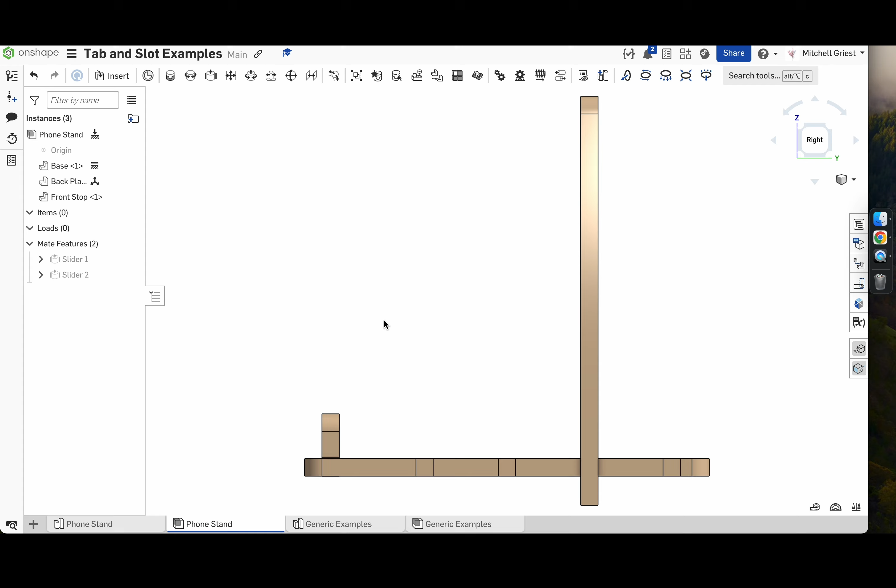From the side, you'll notice it's going to form sort of this triangle. So on some of these slots, it might lean forward. On some, it might lean back. I would say that is maybe an imperfection in the design that we should think about how we could change and improve. But for getting started with OnShape, I think this is going to be a good tutorial for demonstrating quite a few things that you want to be able to do.

So I'm going to create a new part studio. When you're creating a new document to follow along with this, you don't need to click New Part Studio. There's already going to be one created for you called Part Studio 1. So when we open OnShape, we see our three planes. We're going to go ahead and start by designing the base, just because that seems to be what the other parts are designed to fit with. This is kind of the most involved of the parts and the most complicated.

So we're going to design this thing in the orientation that it's typically going to be sitting in the real world. So we're going to design the base sitting down on our tabletop using the top plane. So I'm going to click once on top plane, and then either I'll click the sketch button or hit Shift S to make a new sketch. I'm going to hit the N key to look normal to my plane so I can look at it head on. And we're going to go ahead and define this base plate using the rectangle tool, which sits up here.

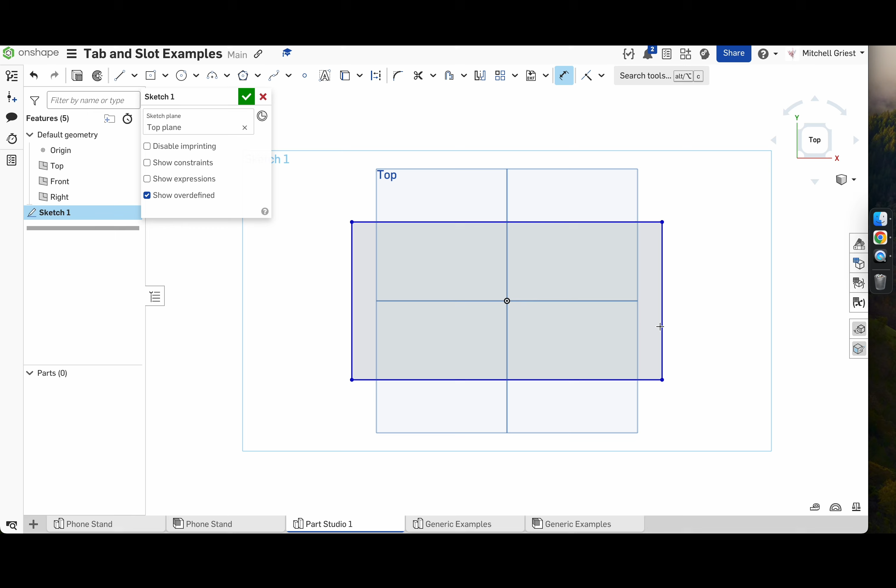We have two options, either corner rectangle or center point rectangle. We want our base plate centered around this origin point, so we're going to use the center rectangle tool, which you can also access by hitting R. So I'm going to click once on the origin, and then I'm going to click again somewhere out here. So now it's time to come up with some dimensions for how big we want this base plate to be. So again, this is something I probably will make and then laser cut out of cardboard and see how it feels in my hands. I might find that the first draft is too big in one dimension or too small in another, and then we can make changes.

But what we're going to do is go ahead and give ourselves an initial dimension, which, by the way, I access the dimension tool by hitting the key D. Click once on this line and once out here. And initially, let's go ahead and say that this thing's going to be 8 centimeters deep. So my units are set to centimeters. You can always double check by clicking on Workspace Units. And right there, your length default unit, centimeters, is what we want. So when I'm in Sketch 1, I've got 8 centimeters set for the length of this thing.

Now the back part is going to be relevant to more than just this piece. So if we go back to our example here, you'll notice this piece that I'm sliding right now has the same exact width as the base plate. And that's because, form factor wise, I just want them to line up.

Technically one could be wider than the other, but I think it looks quite nice if, when these two slots meet each other at the midpoint, we end up with two kind of square shapes that line up cleanly on the edges. And so that means that later on I'm going to want to know the length of this front edge, or we could call it the width of our base plate.

So not only am I going to dimension this by hitting the D key, but instead of just typing in a value here, I'm going to hit the pound sign or the hashtag symbol, and I'm going to type in base width, okay, the width of the base. You'll notice it pops up, it's going to make a new variable. So if I hit enter, I get this little dialog that comes up. It's created a new length variable called base width, and I'm going to type in 8 centimeters. That's what I want my base width to be.

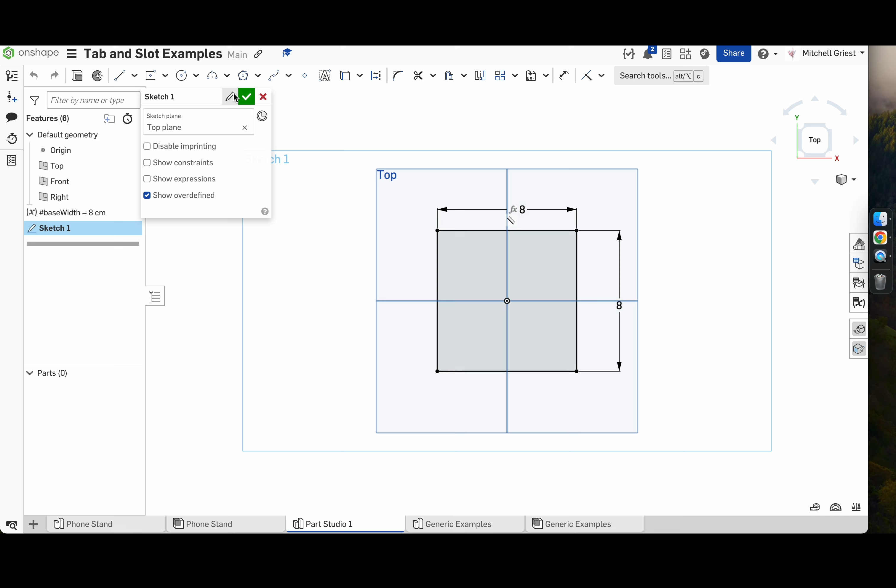So here's the basic footprint of our base. And so I'm going to rename this sketch base footprint, and hit the green check to accept my sketch. So now I want to bring this into 3 dimensions. So I'm going to click once on it and then click on the extrude tool or hit Shift E. And rather than calling this extrude 1, I'm going to call this base. I'm making sure I'm creating a new part. There's nothing to add to so far, but that'll be relevant later.

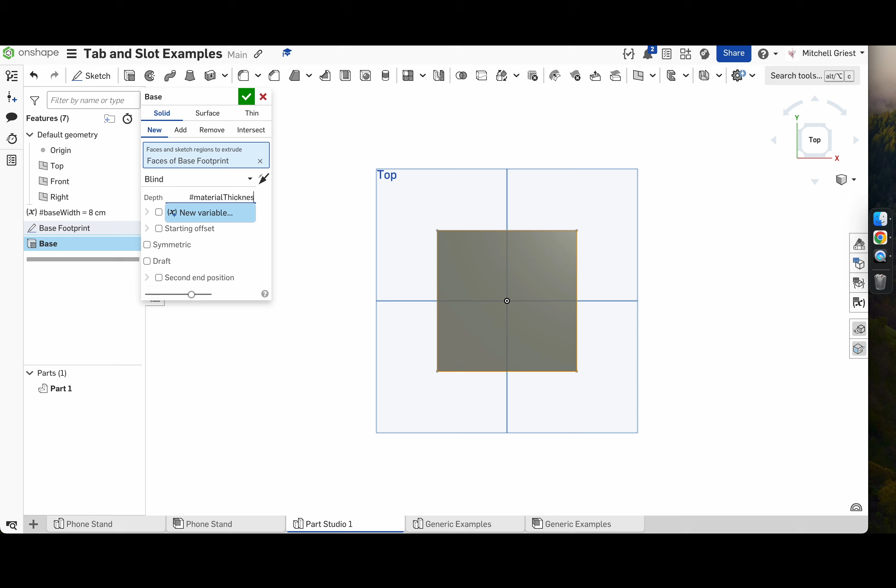And then in terms of depth, I want to model the material I'm actually going to laser cut this out of, but I have a lot of pieces and features that are going to be based on that material thickness. So instead of just typing in 3 millimeters, again, I'm going to hit the hashtag sign and type in the name I want to call my variable. We'll call it material thickness. And then I'm going to define that as 3 millimeters. That's the thickness of the wood that we typically laser cut here.

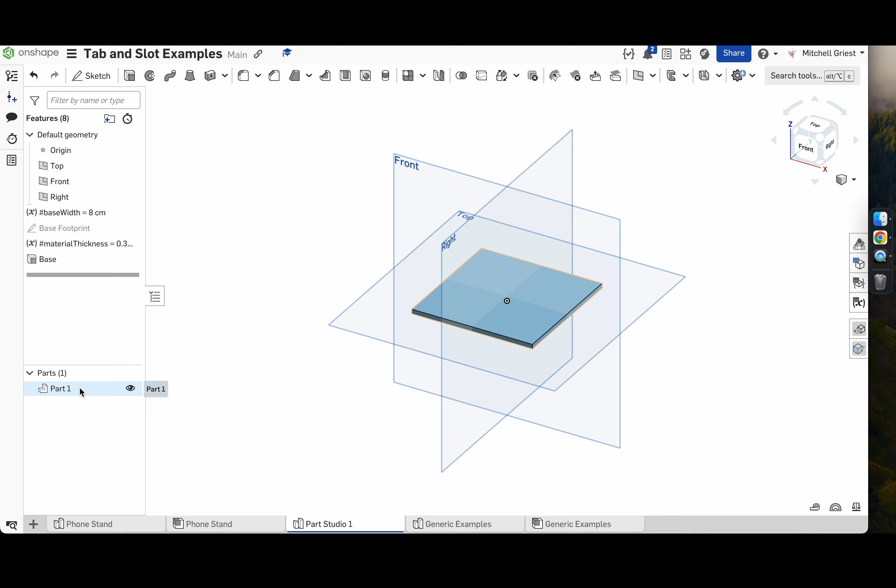So we'll hit the green check, and by the way, to get to this view, you can always just hit Shift 7. If you're ever in a weird orientation, Shift 7 will take you back to this familiar view. So now we can see it's created a part. We actually have a 3-dimensional part. This represents our base. It's not terribly interesting. It's just a square made out of 3 millimeter wood, but let's go ahead and give our part a name, because we're going to have multiple parts. So we'll rename it and we'll call this base.

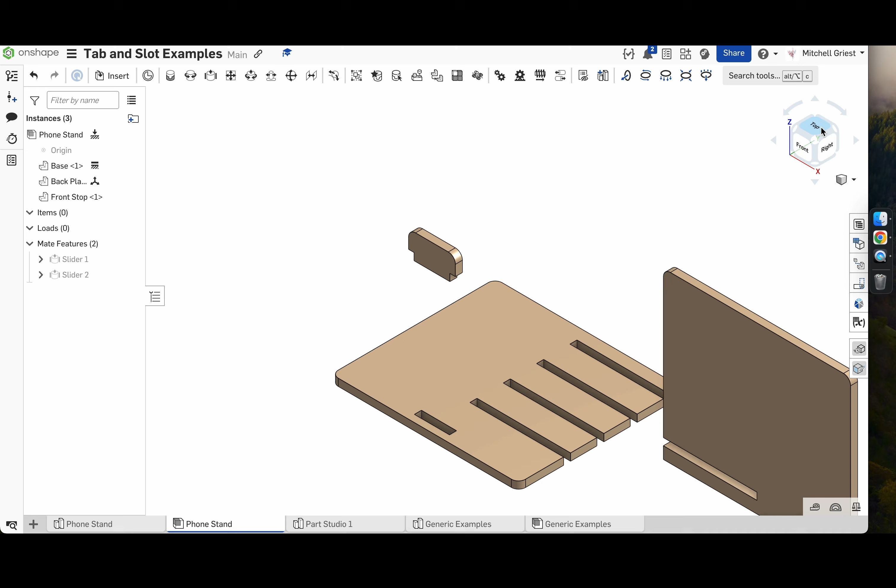And let's go ahead and right click, assign material. Oh, not material, I'm sorry, edit appearance. And I usually like to click this first one to make it look like plywood, just to help my brain as I'm modeling this see how it's going to look in the real world. Now you might notice on the finished example, we've got some rounded corners that make this thing look a little nicer to hold in your hand, a little less stabby. But we're going to save that kind of feature for the end because it's really nice to be able to just reference off of these hard rectangular lines.

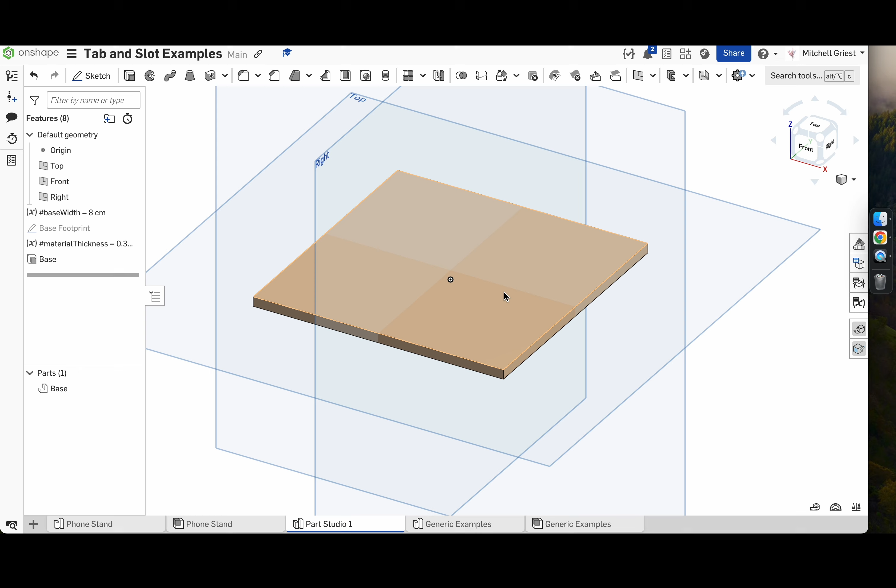So the overall footprint of our base is done. Now it's time to go ahead and add some of these slots that we saw where other pieces are going to plug into this piece. So because we've got a part that we can reference off of, I'm going to hit the P key to hide these planes because we're no longer referencing these imaginary planes so much. We're really just thinking in terms of how these features sit relative to the part I've created. So if we click once on the top surface of base, we can make a new sketch based on that surface, and we can hit N to look directly at it. So what we're going to do first is that little slot where the front catch is going to go.

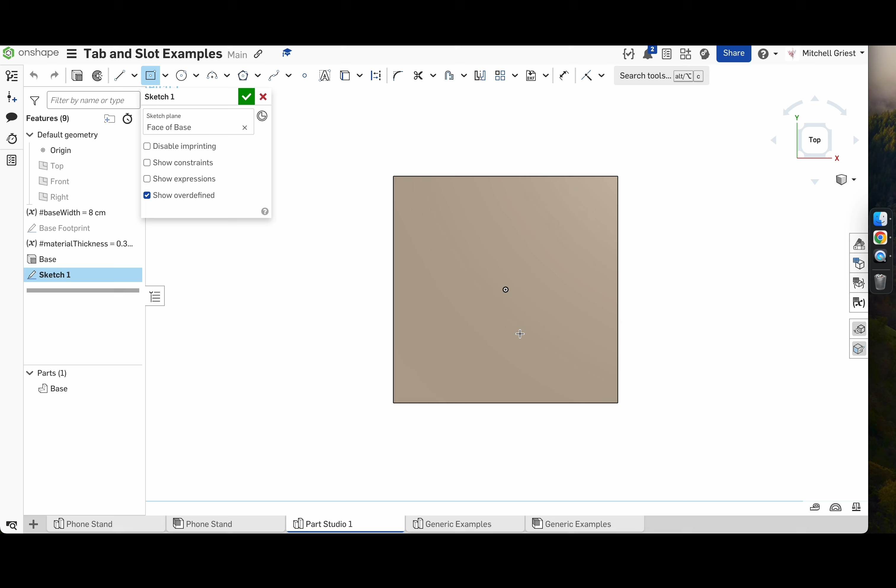So again, I'm going to grab my center point rectangle tool by hitting R, and you can see that if I'm near the center line of this part, it's going to snap and say that this is directly centered on the part below the origin. So anywhere in here is fine, but I actually do want it to snap there because I want this thing to be centered. I'm going to click once and then drag out some distance—doesn't have to look exactly like I want it in the end—and click again. So now I've created a rectangle.

This rectangle is blue because I haven't defined several aspects of it yet. It's got a flexible width, a flexible height, and its location is flexible in one direction. I can drag it up and down, but not side to side, because it's constrained to the center line.

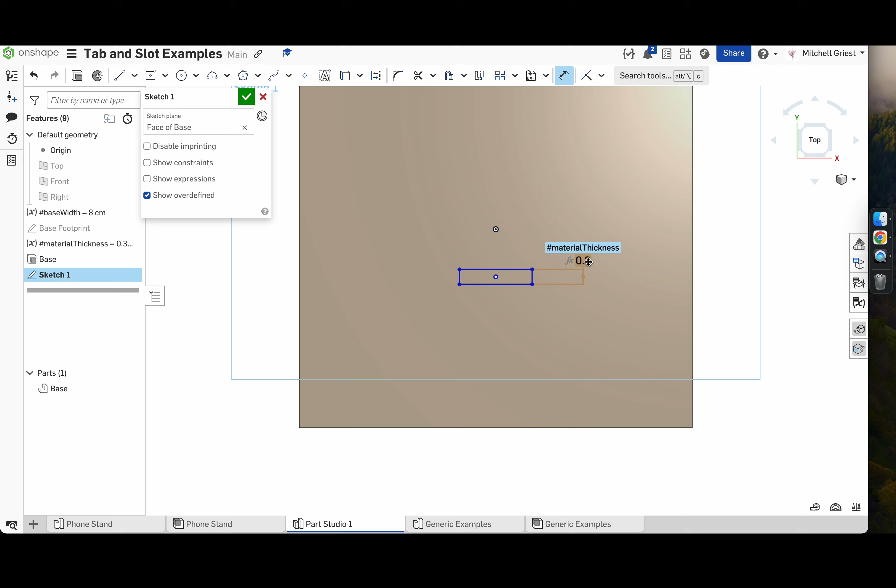So the first thing I'm going to do is dimension this short edge. I'm going to grab my dimension tool and click once on this edge, then once to the side. Now this slot has to be wide enough to accept the material we're building this out of, which means we can reference material thickness. So if we type in material thickness and hit enter twice, it'll dimension it to, in this case, 3 millimeters. The nice thing is if I were to change this value, it would change not only how far the base was extruded, but also the size of this slot, which is really convenient.

So we're going to be using variables a lot because our designs are going to have to be able to change as we prototype them, test them out, and find mistakes. It's really nice if you've thought ahead and used variables rather than having to go back and find all the 0.3s in your sketch and change them to 0.4s or whatever it is you decide to do.

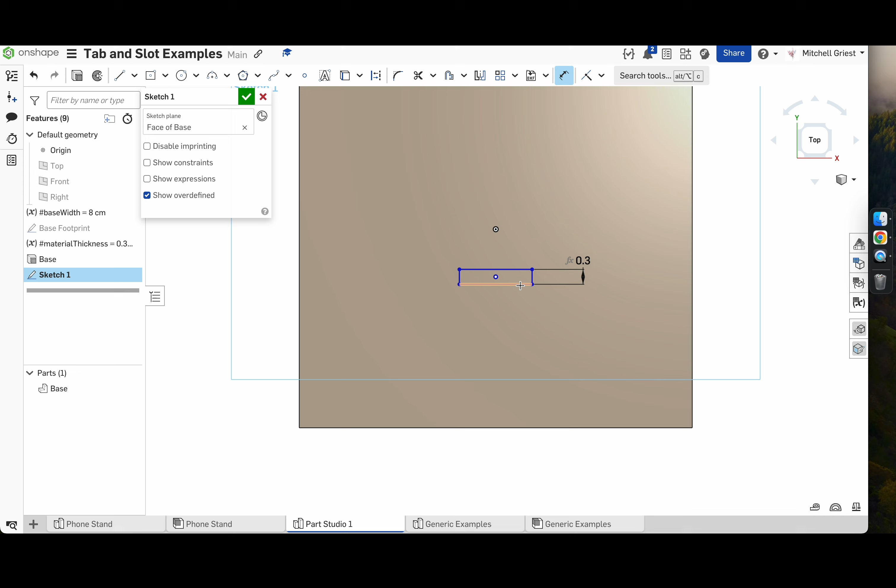So we need to define a couple more things. One is how wide is this slot going to be? We're going to create a new variable, because there's other parts that are going to reference this same thing, and we'll call this short slot width. Let's go ahead and put that in—it looks about the right size to me. So let's say it's going to be 1.5 centimeters.

So now we've created another variable called short slot width that other parts will reference, and set it to 1.5. Now the last part, and the reason this rectangle is still blue, is because we haven't constrained where it is vertically on the part.

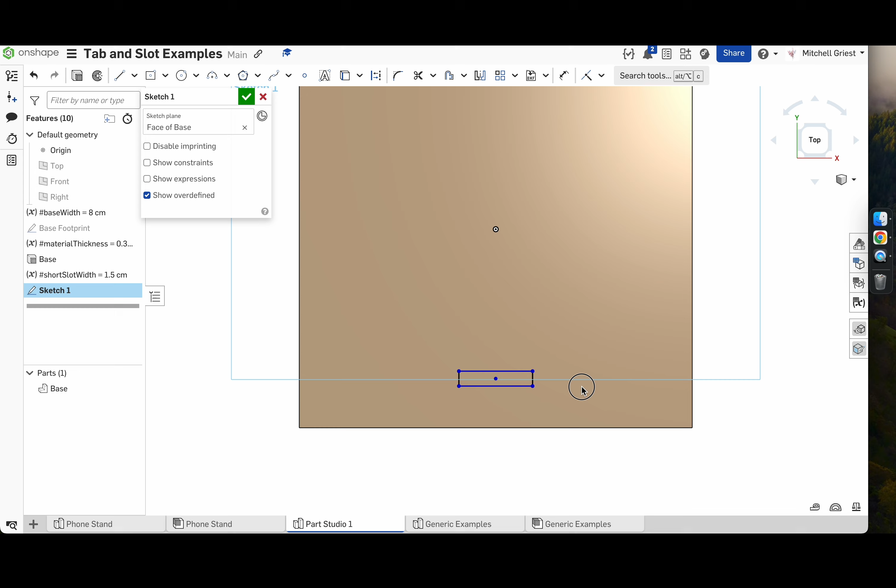So what I'm going to do is go ahead and drop a dimension by clicking on this line and then on this front edge of the base, and now I can dimension how far apart they are. Sometimes I'll use 0.3 centimeters or 3 millimeters because that gives us a little bit of sturdiness here without too much wasted overlap in the front. You may find that that's too thin and too flexible depending on your material, so maybe you want to change that. But I'm going to go ahead and just set that to 3 millimeters there.

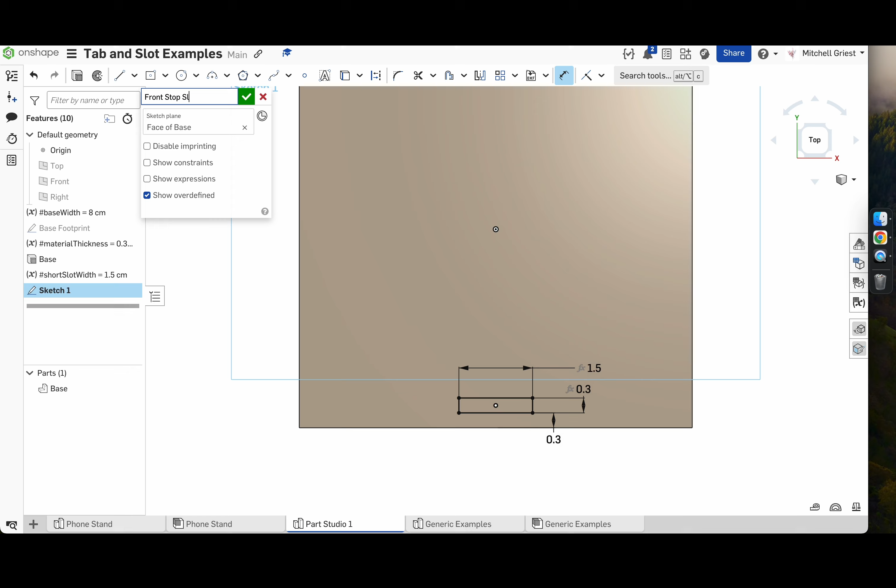Let's go ahead and name our sketch so that when we come back to edit our part later, we know what we're looking at. We'll call this the front stop slot, because that's the slot where the front stop is going to plug into the base plate.

We'll accept our sketch, and you'll notice our part hasn't changed overall. It's still a solid piece of wood. It now just has this faint rectangle on it. Well, that's because we made a 2D sketch, but we haven't actually brought that sketch into the third dimension yet.

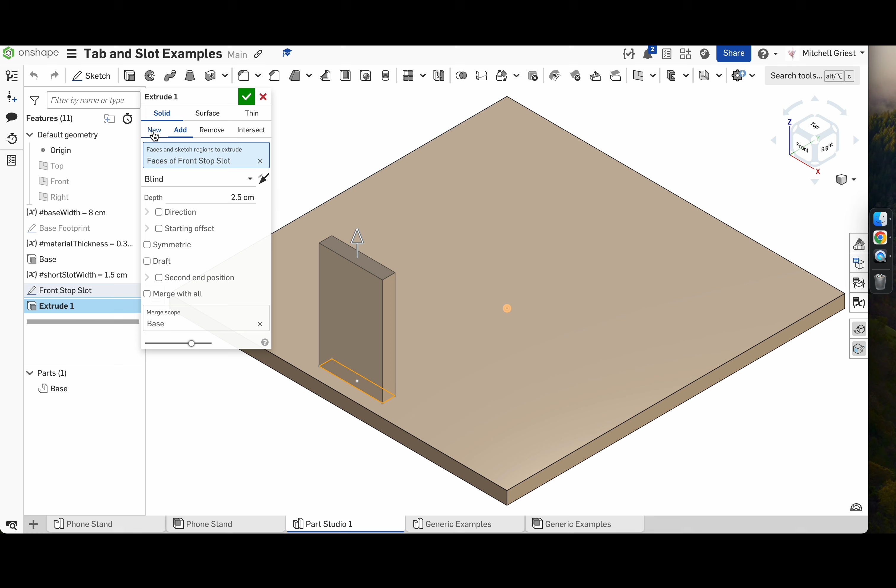So if I click once on it, again I want to use my extrude tool, only now instead of adding material or making a new part, I want to remove material based on my selected sketch. Now I don't want a blind removal, which just means remove up until this arbitrary depth that's set here. I want to remove through all—regardless of how thick this base plate is, I want this hole to go all the way through it.

I'll rename this and we'll call it front stop slot again. This is the three-dimensional extrusion of it, and we'll hit check. And now our base has a hole in it that goes all the way through.

The nice thing is, if I were to change my material thickness—let's say we made it 7 millimeters, or 7 centimeters, let's make it 10 millimeters—if I change that, you'll notice a couple things have changed, right?

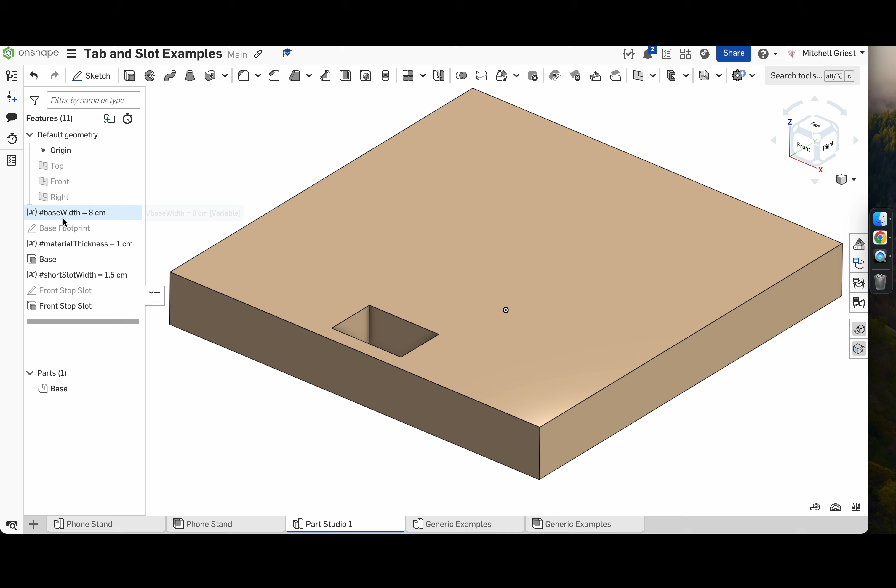Our base responded to that, it's actually thicker than it used to be. And this slot responded accordingly because it's now wide enough in this highlighted dimension to accept some of this material into it. Okay, let's go ahead and put that back to the actual 3 millimeters we'll be using.

You can see that our responsive program is updating things based on the variables that we take time to create names for. So for the next part, let's go ahead and cut in these couple of slots.

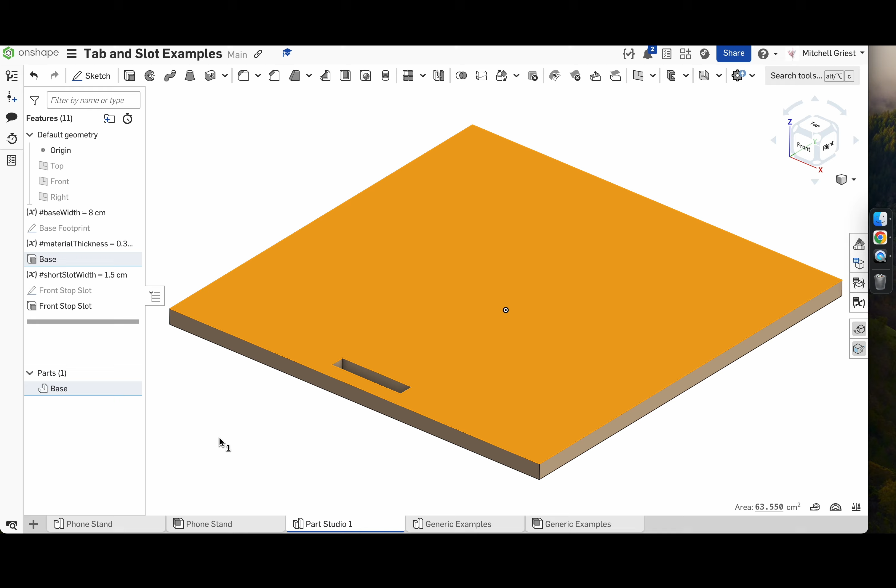These slots allow us to put the backplate in at different positions for different viewing angles. Just like we did before, we're going to click on the surface, this main top surface of the base plate, make a new sketch, and hit N to view normal to it.

We've got a couple of ways we could approach this. What I might do is start by using not the center point rectangle, but the corner point rectangle, or hitting the R key. I know that I want one edge of my rectangle, or one corner, to be on this line. So I'm going to draw a rectangle initially, and I'll make it bigger than we need.

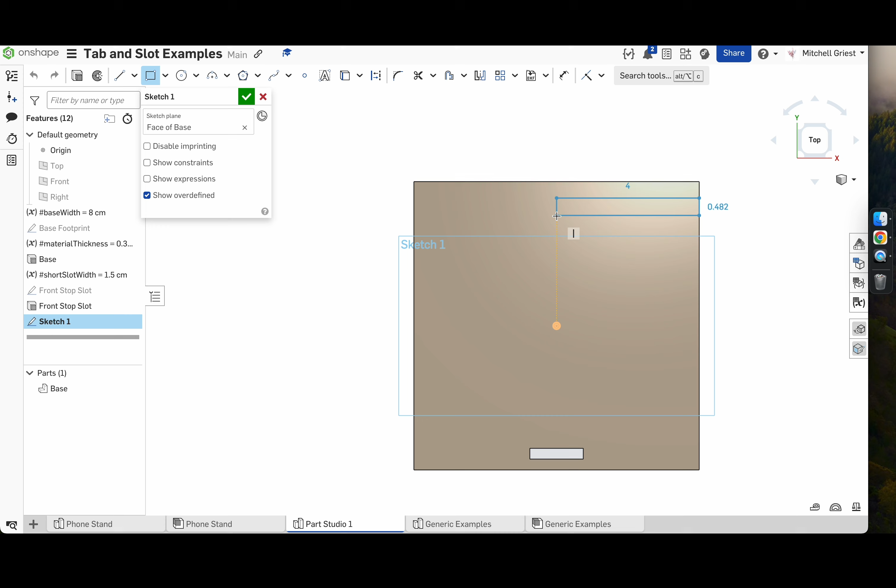But the one thing I want to do is make sure that it lines up with the center line and nicely snaps to that yellow line. That's because for this particular design, I think I want the base plate and the back plate each to have a slot halfway through, and since they're the same width, they'll line up perfectly edge to edge when I slide this in, at the same moment that this line hits this edge.

Oh, you know what? I think I thought about that. No, I think that's correct - our part should lock into place just like that. And if I'm making a mistake now, the beauty is we'll be able to make a prototype and then come back and adjust our sketches.

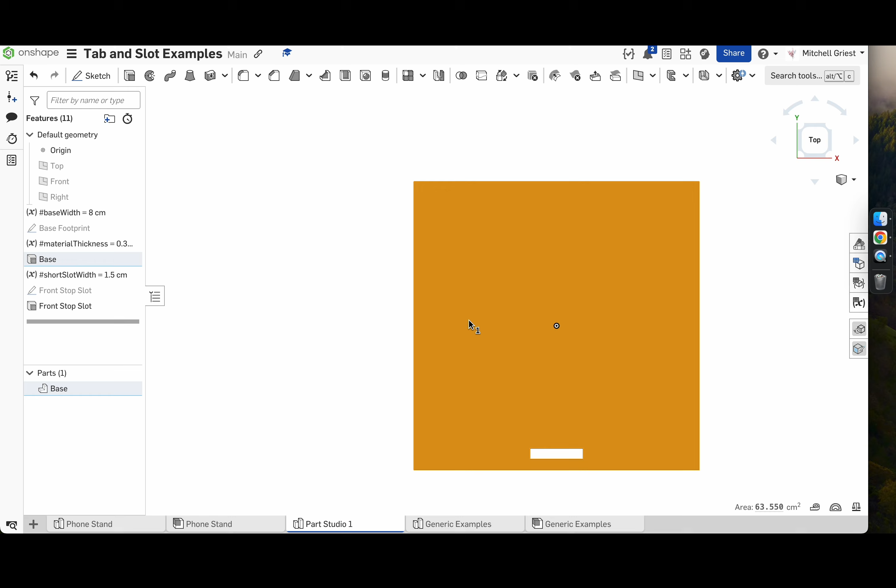So let's go back in - I actually accidentally deleted that sketch, but we can grab our rectangle tool. We'll draw a rectangle, making sure it lines up with the center line. And the first dimension I'm going to apply is by saying that this short edge needs to be based on, hopefully you guessed it, the material thickness.

That's going to tell us that this is wide enough to accept another piece of this wood that's going to slide in from this side. I'm also going to say for my backmost slot, by dimensioning this line and this line relative to one another, that I want to leave, let's say, 5 millimeters gap from the back to make this thing a bit sturdy. That looks a little bit short, so I'm going to say instead 7.5 millimeters.

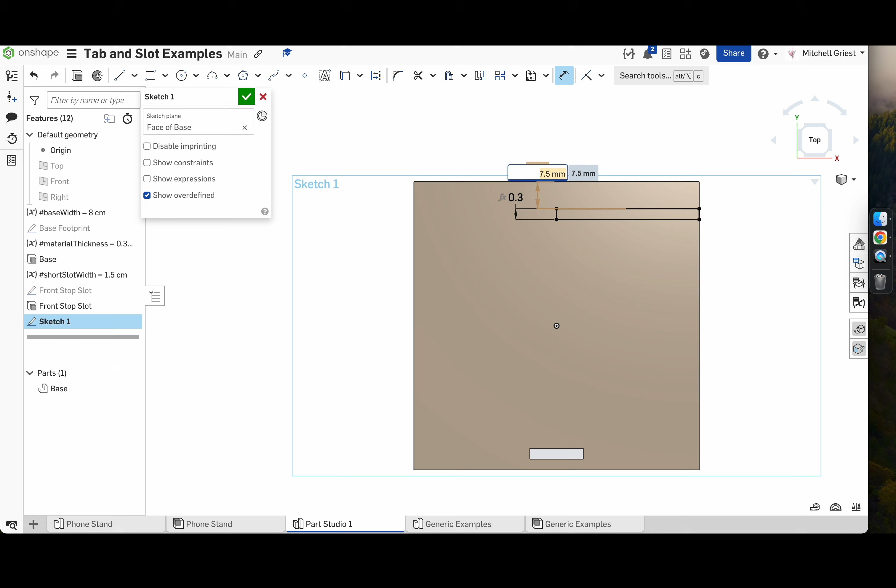I think I like 5 - not 5 centimeters, 5 millimeters. Nice thing is we can change this anytime we want.

So this is great, it gives us one slot, but we actually want to have multiple possible viewing angles. So I'm going to go ahead and drop a couple more rectangles in. I'm going to let them snap to this line, but I'm not going to worry about their positions or their sizes too much right now. So I'm just going to drop a few more rectangles in.

Here's a nice chance to use the equal constraint, or hit E. First of all, I want all of these short edges to be the same length. So I'm going to click on the one I've set and then click on another, and that sets them equal to one another.

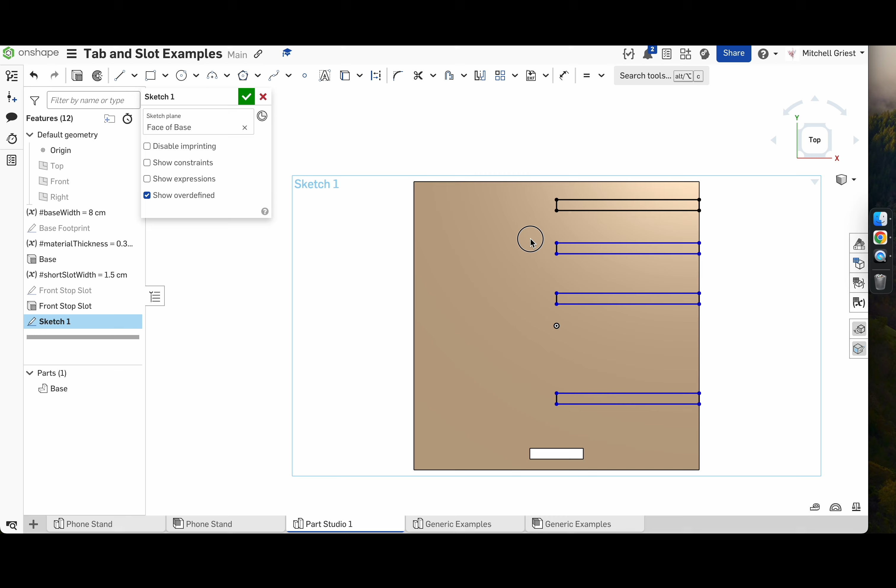So now all of these slots are going to be responsive. If I were to change this material thickness, all of them would change accordingly, which is awesome. They're already constrained to this center line, so really all I have to worry about now is the fact that they can slide up and down.

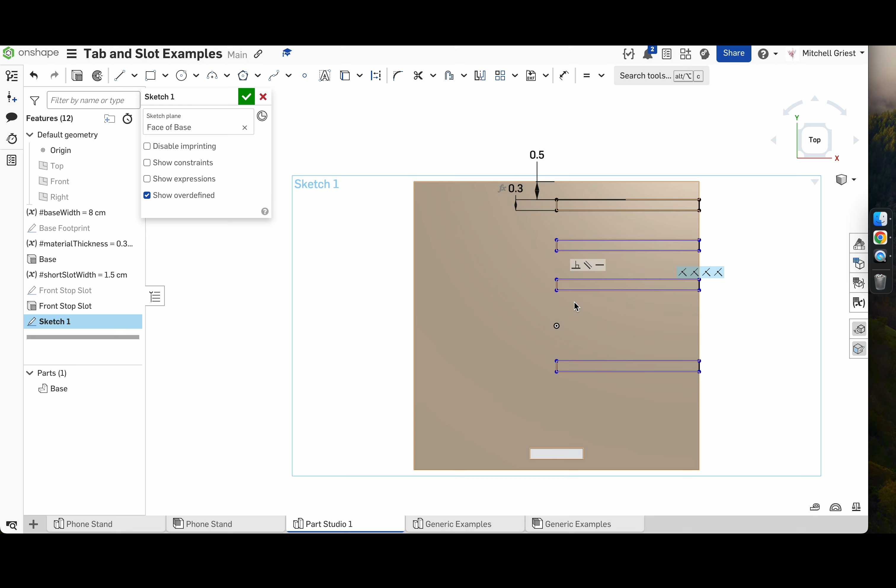So what we're going to do is adjust these around to where we want our different viewing angles to be. I know I've set this back one. What I think I may do is go ahead and create some equal spacing. There's a lot of reasons you could come up with different positions for these, and you may find in prototyping that you want to slide them around to non-equal spacing, because that's just kind of the way you end up wanting your phone to sit.

But for the sake of instruction, we're going to go ahead and grab our line tool, or hit L, and we're going to turn on this construction tool, which is also accessed by hitting Q.

What that allows us to do is draw these dotted construction lines that tell the computer, hey, I don't actually want to cut based on this. This isn't a real part of my sketch, but I do need a line here for some constraining purpose or reference.

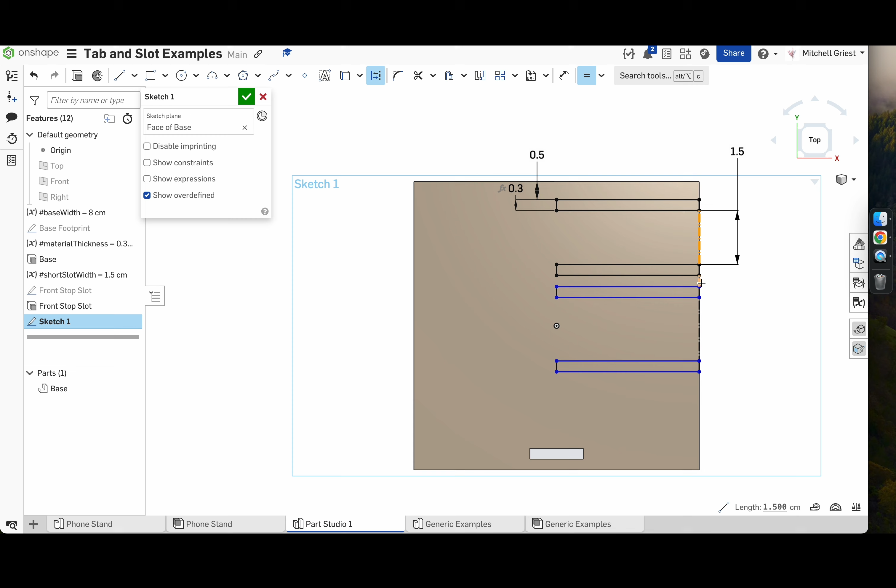So I'm going to draw one of those for connecting the inside points of each of these sets of slots. I've drawn 3 construction lines, and now I'm going to dimension them. I'll dimension just the first one, putting in 1.5 centimeters from the front edge of this slot to the back edge of that slot. Now I can use my equal tool and say I want each of these construction lines to be equal in length.

So now I have 4 equal spaced rectangles, and I can change that spacing just by changing this number. If I set it smaller, they become closer together; bigger, and they become further apart. This isn't going to be an okay placement for the front slot, so let's put it at 1.5. I think that looks good. Again, you don't have to have these equal spaced, but it gives us a nice excuse to use construction lines and the equality constraint.

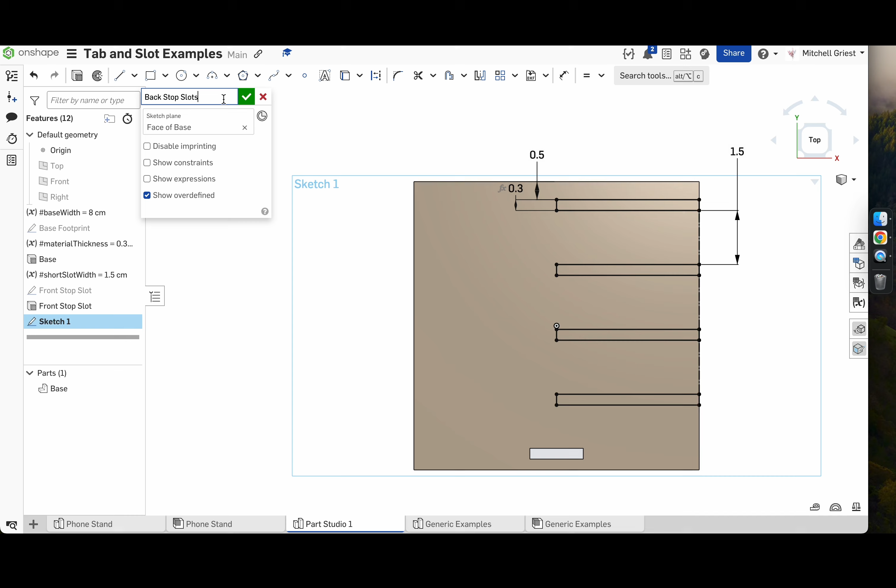So now our sketch is fully black because it's fully constrained, and let's call this Back Stop Slots, because those 4 slots are where our backstop is going to slide into the base. We'll hit check, and now we can see our base includes these little sketches on it, but we haven't yet extruded them.

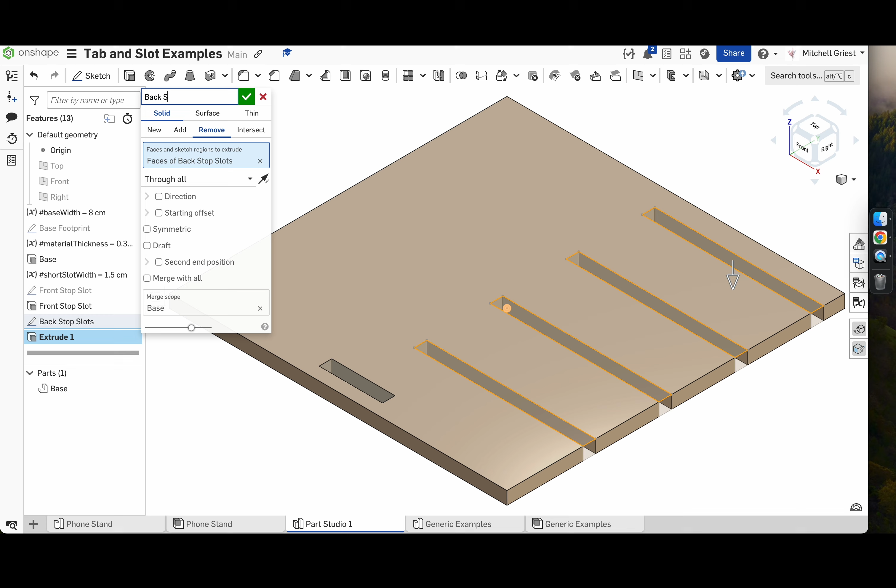So we're going to click on the sketch we just made, click the extrude button, make sure we're removing material all the way through the part, call this again Back Stop Slots, and hit the check.

So at this point, our base is actually looking pretty much complete. We'll add a couple of rounded corners to make it nicer to hold later, but the base is looking done.

So what I want to do is move these variables we created up in the feature tree, just to keep them together. There's no harm in having them defined earlier. You'll notice if I try to drag them down, I get red, because this base footprint was trying to reference this variable, which now doesn't exist above it in the tree. So I'm going to undo that change.

But all of these sketches and extrusions relate to the base, so I'm going to click on the top one, hold shift, and click on the bottom one to highlight them and put them all in a folder. We'll call that folder base. This lets me organize my feature tree, with my variables at the top where I can see and reference them, and everything related to the base in this little folder.

So with that being said, I'm going to hide this base plate. We're going to hit P to turn back on the planes, and now we're going to start work on our next piece. We could go for either one of these, but I think it might be nice to do the next big simple piece next.

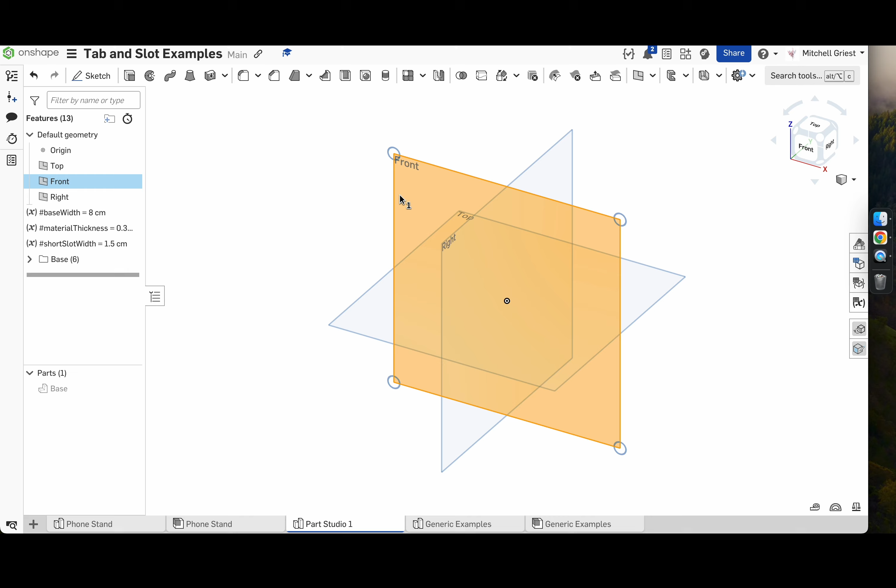So we're going to create this back plate. We'll go back to our part studio. Now this one's going to be in a more vertical orientation, so we'll click on the front plane and make a new sketch. Hit N for normal, and again we're going to want to use a rectangle to lay out the overall form factor of this backstop.

So I'm going to choose a center point rectangle, and click somewhere on this line above the origin. There's a lot of ways you could define this part; my personal preference would be to define it centered on this line, but somewhere up above the origin.

So I'm going to just lay in the general shape of my part. I'd like it to lie where this edge is on this plane down here, so I'm going to hit I, or use the coincident tool, to say that this line falls on this plane.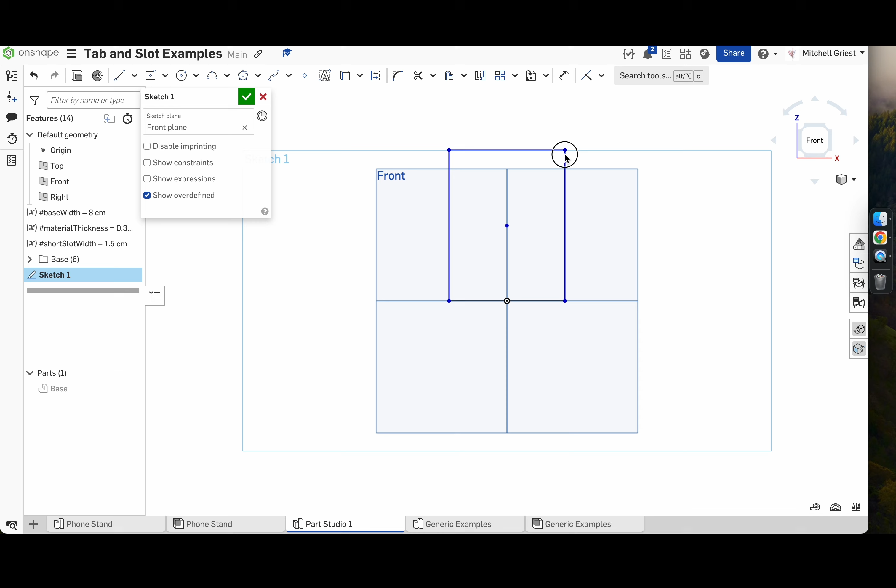And now it's time to just dimension the last two parts. I haven't dimensioned its width or its height, only where its bottom edge lies. Its width needs to match the width of the base, so I'm going to click here, and instead of typing in a number, I'm going to start typing base, and you'll notice I can select that variable I set before.

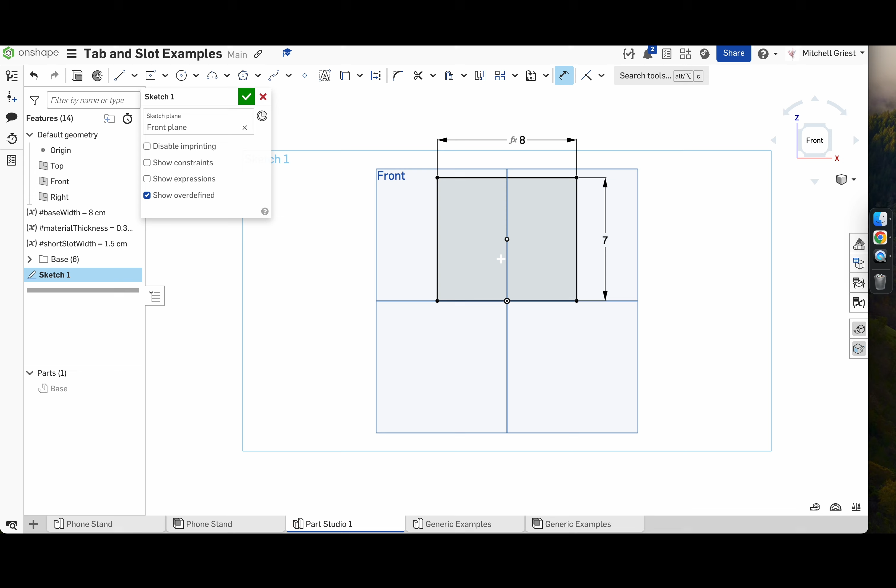The great thing is if I update base width, now it'll update both of these parts automatically. The height is kind of up to me. I think I'm going to go with 7 centimeters tall. We'll see when we make an actual prototype if that's too tall or too short. But this is going to work for the position and dimensions of our backstop. So we'll call this backstop. We'll hit the green check.

And now it's time to bring that 2D sketch into the third dimension using the extrude tool. Now, if you haven't hidden your base part, this might choose to try and add material to the base. We want to make sure we're creating a totally new separate part by clicking new here. Blind is fine, but for depth, we want to reference that material thickness variable again so that this is set to the actual thickness of our material, our wood, and we'll call this backstop.

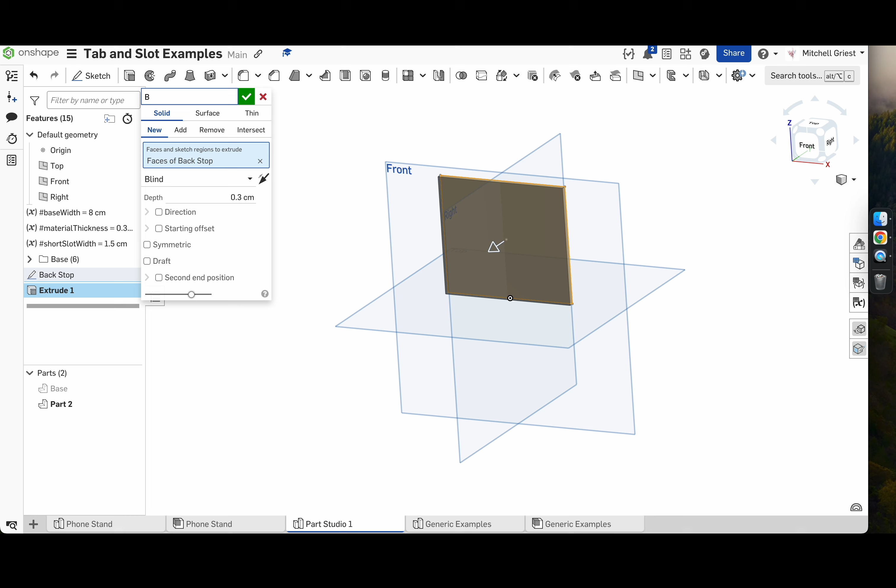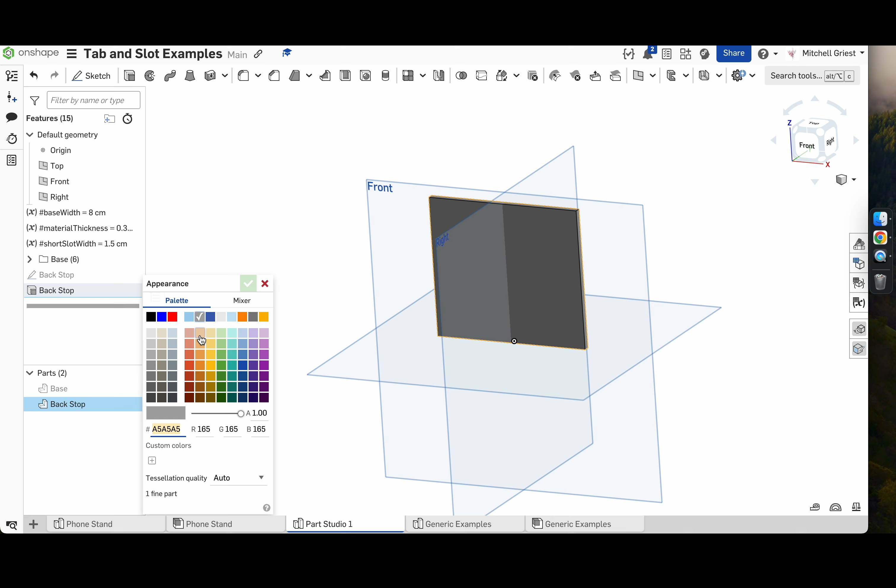That's the extrusion. So we've created now a second part, which is named part 2. We're going to name it backstop. And if we look at both of them, they kind of overlap each other in an impossible way in space, but that's fine. We're not doing the assembly yet. We're just creating our parts one at a time. So just like before, I'm going to right click and say edit appearance, make it look like it's made out of wood. And now we can go ahead and hit P to hide those planes so that we can just look at the part we're actually manipulating.

So this part has fewer features. It really only needs one single slot because it's going to slide in right here. This slot's going to line up with any one of these 4 slots for this particular design. And so to make that happen, I'm going to click on this front face, make a new sketch, hit N for normal, and now we've got to define a corner point rectangle, which is the R key or this corner rectangle tool. I'm going to put it roughly in the position I want. I am going to let it snap to the center line for all the reasons we talked about before.

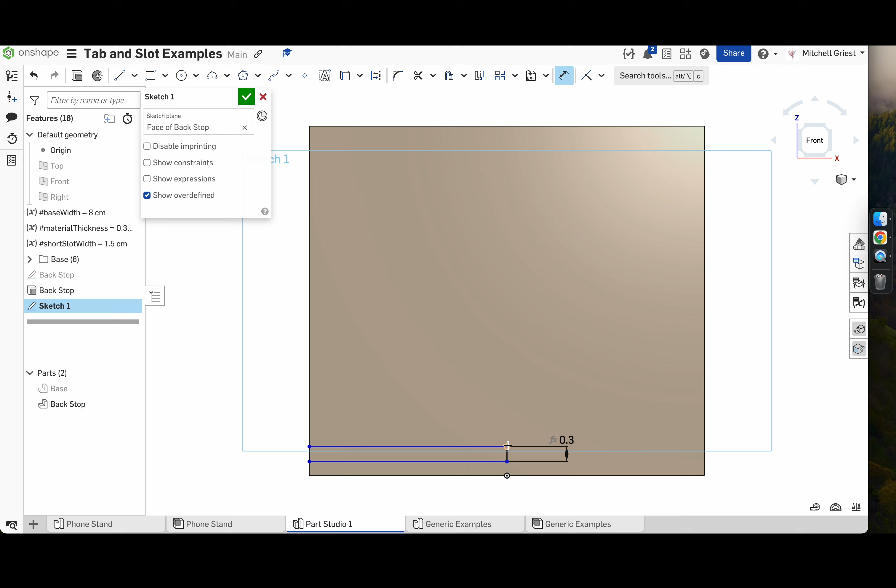And now it's time to hit D for dimension. Click on this, and hopefully you guessed that's going to be material thickness based on the wood that's going to slide into there. And its width is already set. So the only free unconstrained property of this rectangle is how high up and down it is. So I'm just going to choose, for this I think I'm going to go with 5 millimeters. That looks a little too high up actually. I don't want that much lean. So I'm going to say 3 millimeters. And we will call this the backstop slot.

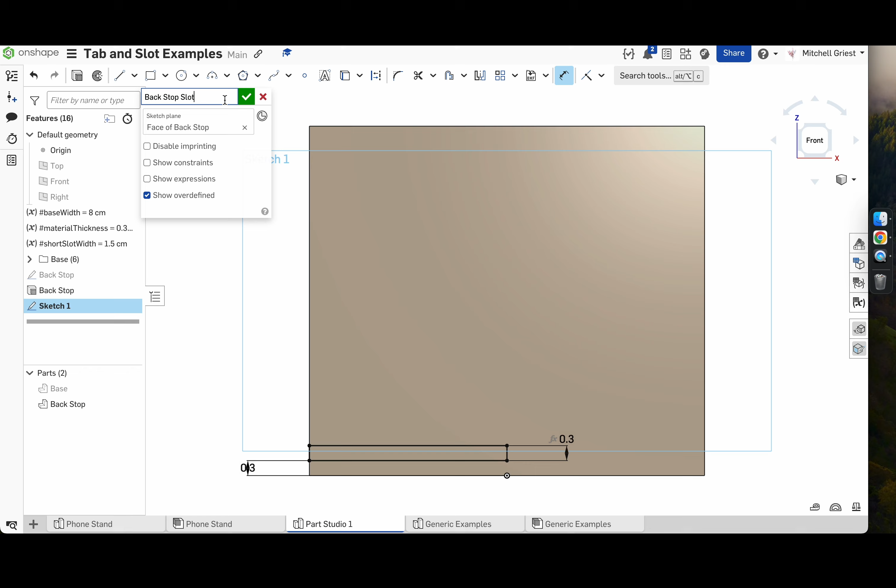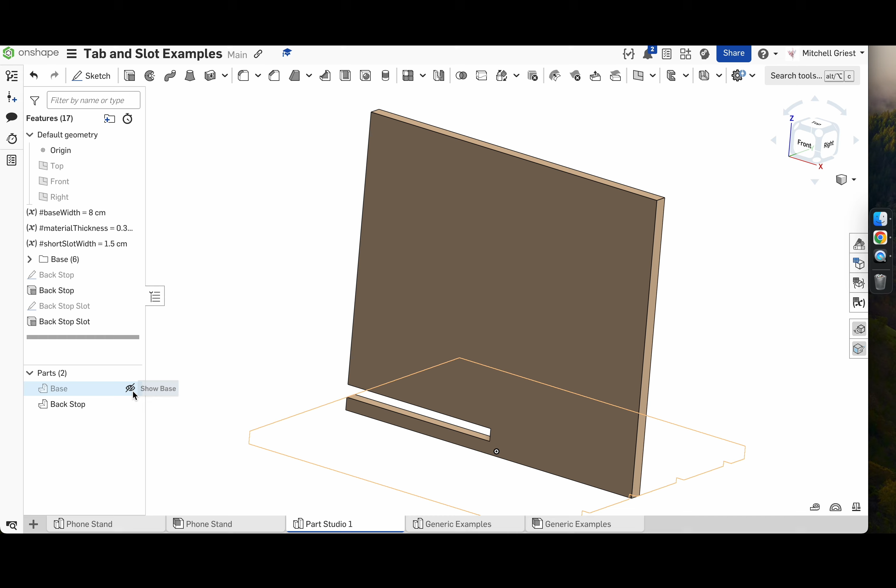And I'm going to copy those because we're going to use that same name for the extrusion. So just like before, we'll extrude, removing material through all, and we'll name it backstop slot. And now we should see our backstop actually has a slot where it can slide into our base, which is great. So we've got 2 of our 3 parts completed at this point, or nearly completed.

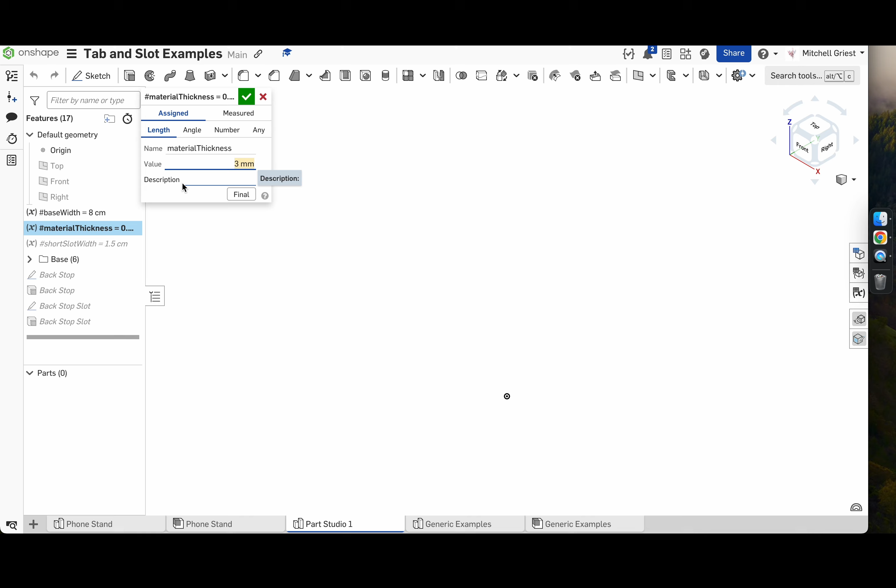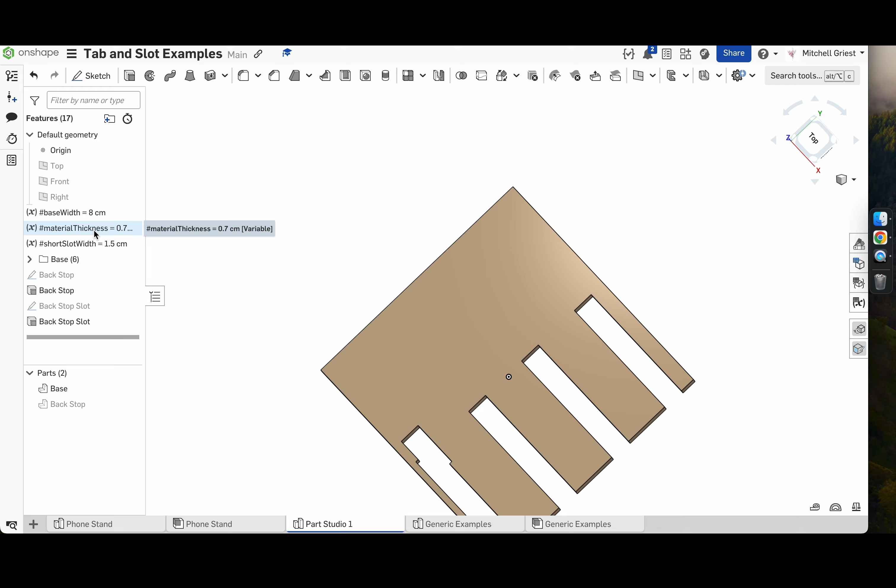Let's go ahead and double check by changing material thickness from 3 up to 7 millimeters. And if we change that variable, you'll notice everything gets really nice and blocky. What we're really looking for here is, did this slot respond? Yes, it did. Our backstop also responded. Now this chunky cut here obviously is not the way we would want things to line up, but that's because of the way we've defined the sketch to be as thick as the material plus 1.5 centimeters in between. So this design would need to change a little more to accommodate such a thick material, but the good news is we're working in 3 millimeter wood.

So the last thing we need to define is this little mushroom shaped front stop that keeps the phone from, if we were to try and slide a phone right here, it would probably just kind of slide out the front of the stand. So we're going to put this piece there to keep it in place.

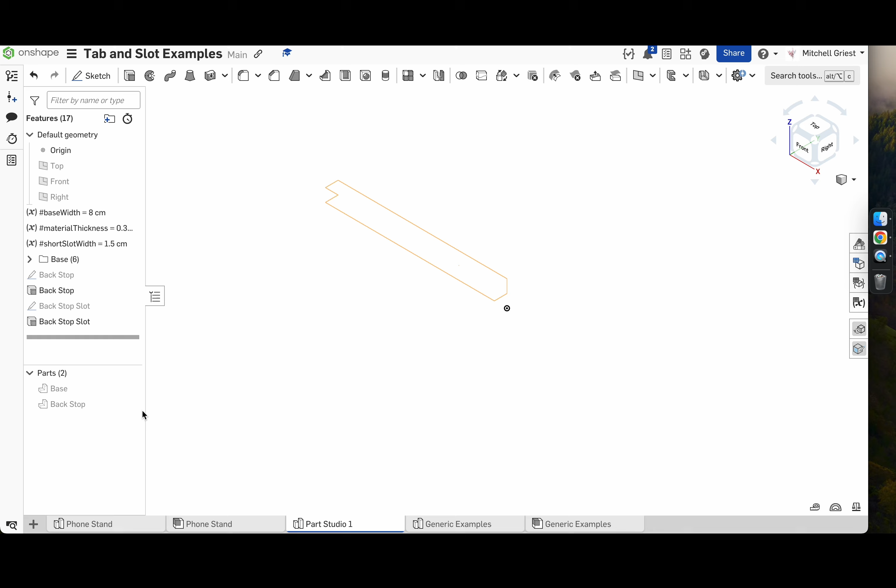So we are going to hit P to turn back on the planes. We're going to define this in the front plane, because just like the backstop, its main orientation is going to be in this kind of vertical orientation, and that's its main profile there. So we'll click on front plane, we'll make a new sketch and view normal to it.

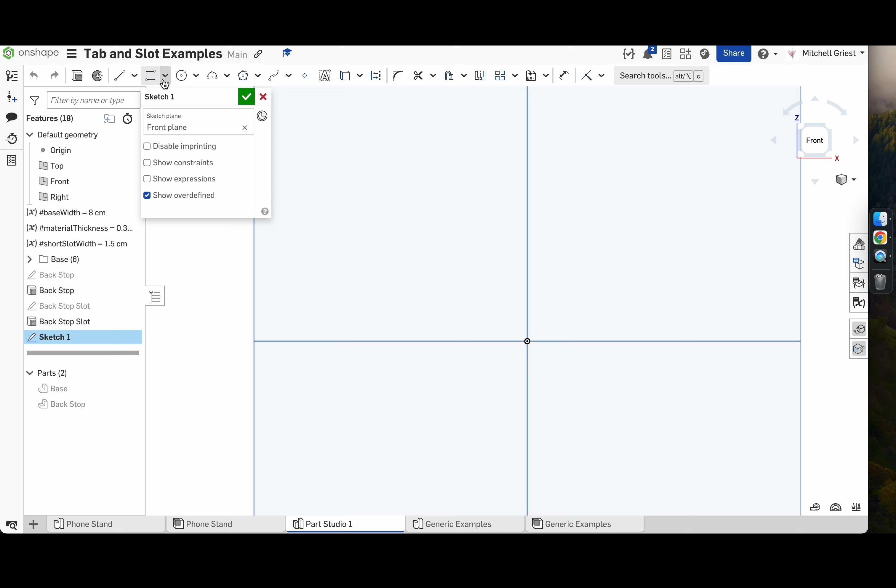And the way I would usually go about making this is using a center point rectangle centered on this line somewhere above the origin. I'd make one of those, and then below it another one, and these are just kind of floating in space because I'm going to use my coincident tool to say that this line lines up with this line and the bottom edge lines up with this line. So now I've kind of defined the rough shape I'm looking for. I haven't related them to one another in terms of relative size yet, but let's go ahead and dimension this to be our material thickness.

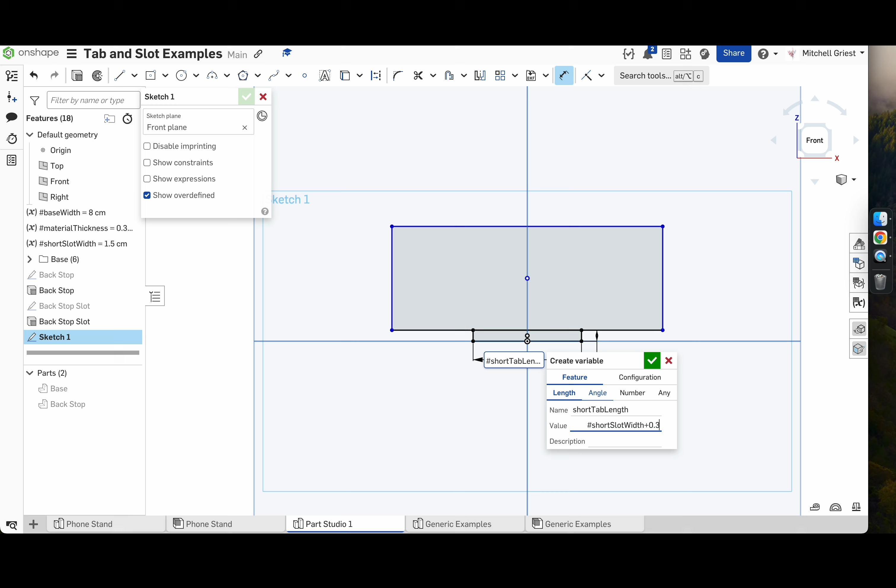This is the tab, and this part is the tab that's actually going to go into that first slot we made in the base. And so we're going to make a new variable called short tab length, and it's going to be based off of, this is kind of cool, we can reference another variable within a variable. So we'll take our short slot width, and we're going to make it slightly larger so that we get a press fit. So we'll go 0.3 millimeters in addition to our short slot width. So that's going to make our tab just a little bit wider than the hole it's supposed to fit in, which should give us, with wood, a nice press fit. And if we need to change that value later after prototyping, we will.

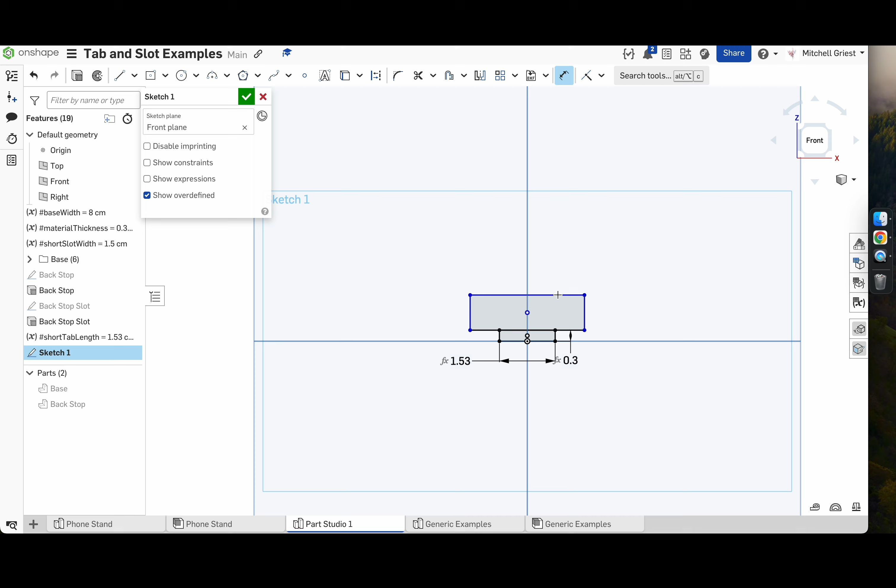The last thing we want to do is define the last two dimensions of this part. We got to tell it how wide to be and how tall. So in terms of width, I'm going to go with a pretty arbitrary 2 centimeters here. That's not a terribly wide thing, but again, we're trying not to cover too much of the phone screen with this little piece that sticks up. And then in terms of height, this is again an arbitrary choice that we might change later, but I'm going to say let's make it 0.75 centimeters tall.

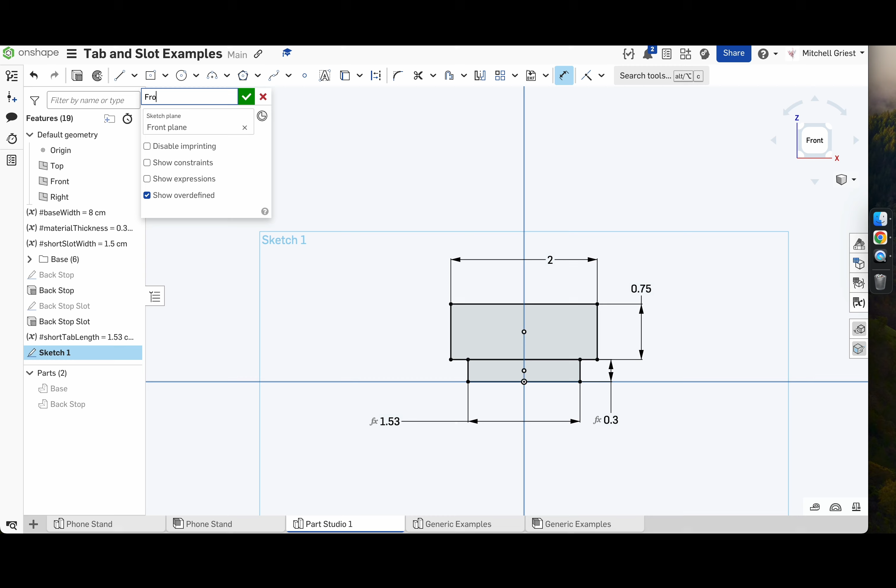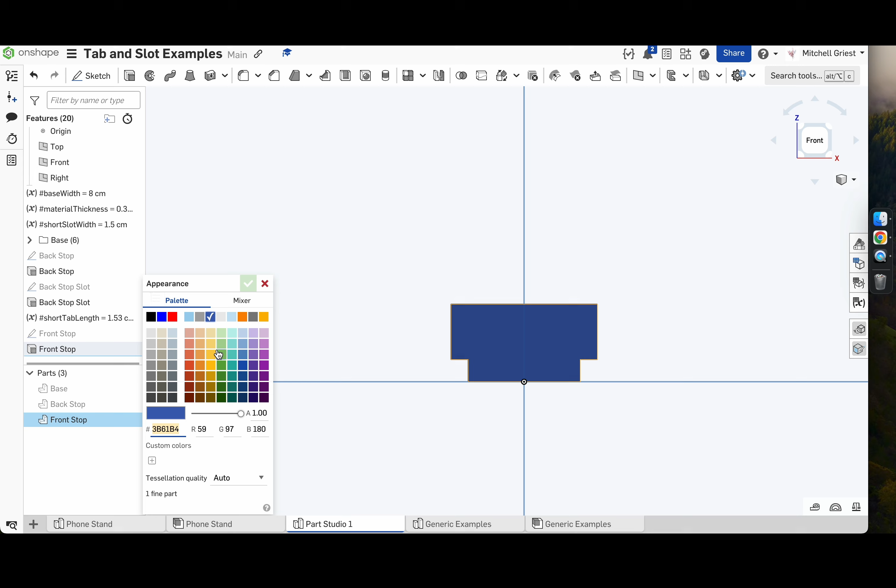That gives us an okay looking part that we may want to change the dimensions of later, and we'll call this the front stop. At this point, we can extrude that into the third dimension, making sure we're creating a new part whose thickness is material thickness, and it's called front stop. We'll rename it over here, and we'll assign it the color of that same plywood material by editing the appearance. And so when we zoom back out, we can show that we've got 3 parts now, one of which is this little part we just created.

So in a minute here, we're going to get to relating these in assembly and adding some of these nice rounded edges to make things look a little bigger so we can visualize, and then this will be ready for laser cutting and prototyping.

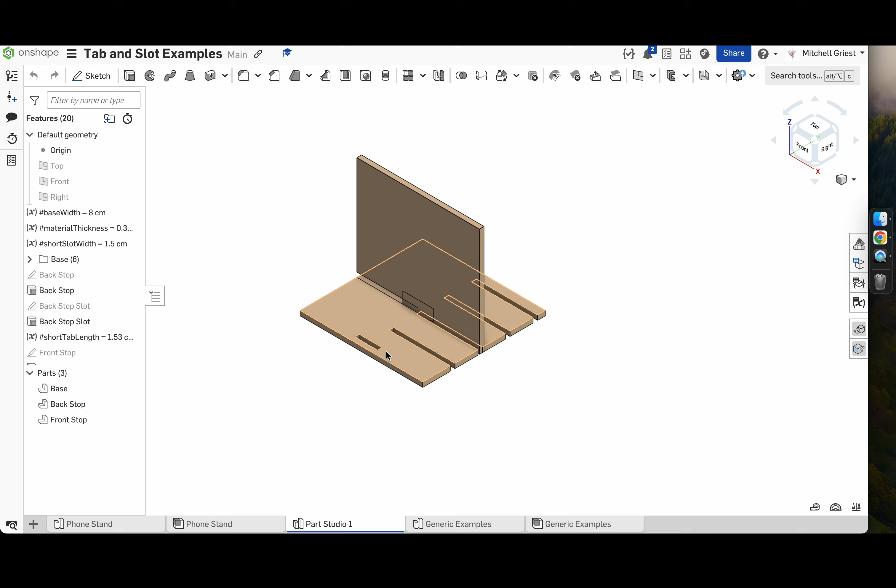So when we last left off, we had completed the basic design of each of our 3 pieces, or at least the first draft of each of our pieces. So now we're going to cover how we're able to get these smoother corners to make this a little bit more accessible, a little bit less likely to accidentally scratch someone with sharp edges. And you'll notice a couple of places we haven't smoothed the corners. So we've kept these corners square because when the part is assembled, I'd like it to sit flat on the table. I don't necessarily want it to be able to roll over on this edge. And then anywhere we have tab and slot meeting together, we want to keep those at right angles.

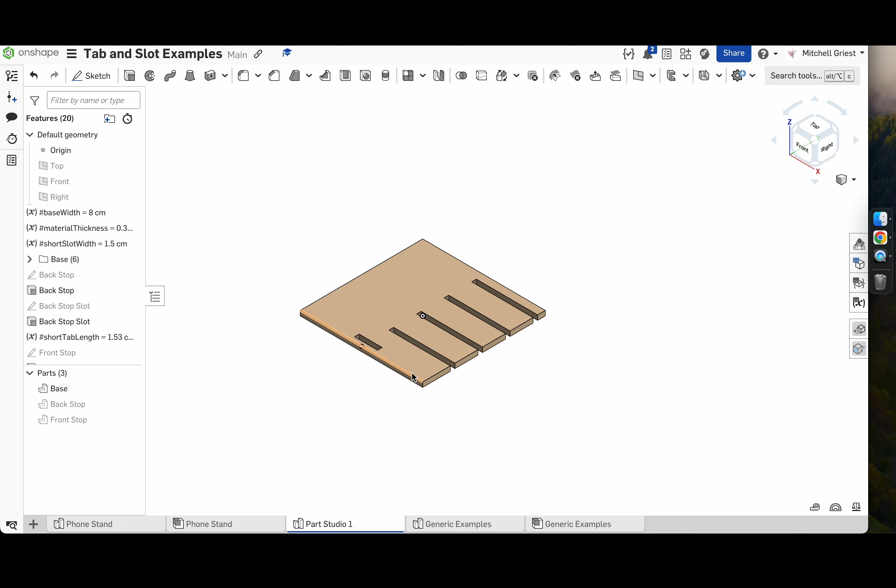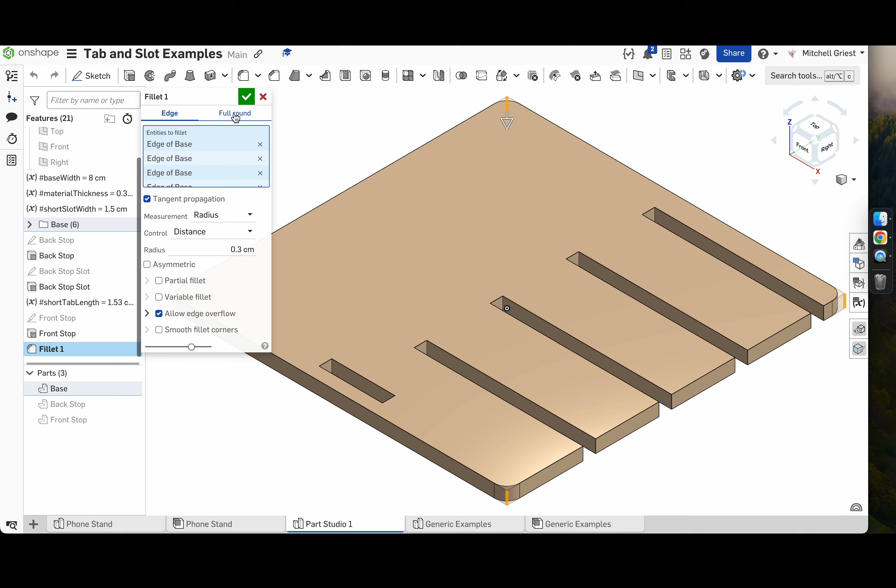But we're going to use a tool called the fillet tool. So let's start with the base. We want to round these 4 corners of the base. And so I'm going to zoom in and actually just click once on that edge. And we're going to do that at all 4 of the corners. We're just clicking on each of them one at a time. And then we'll rotate around so we can get to this final edge. And once I've selected all 4 of the edges I want, I'm going to choose this fillet tool, or hit Shift F, and it's going to apply a rounded edge there, and we can decide what radius we want.

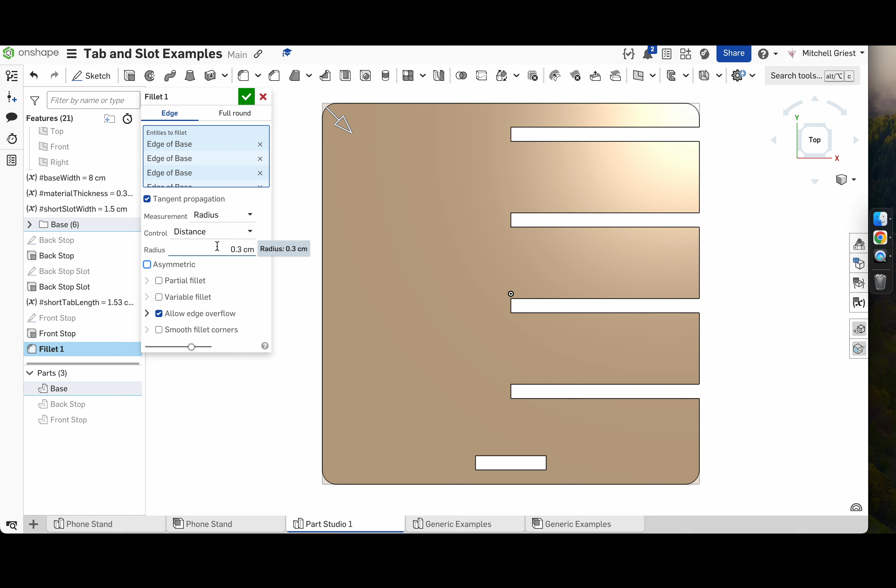Now, our limiting factor is going to be this top right corner in this orientation. You can see if I put in a larger number, I get a smoother round, and that's ultimately probably going to be fine here. But remember, there's only about 5 millimeters separating this edge from this edge, so I may want to go with a slightly less aggressive fillet and still round out the corners. So I think 3 millimeters is going to be plenty. You could of course change this later to whatever you like. But with that fillet added, our base has been smoothed out at the edges.

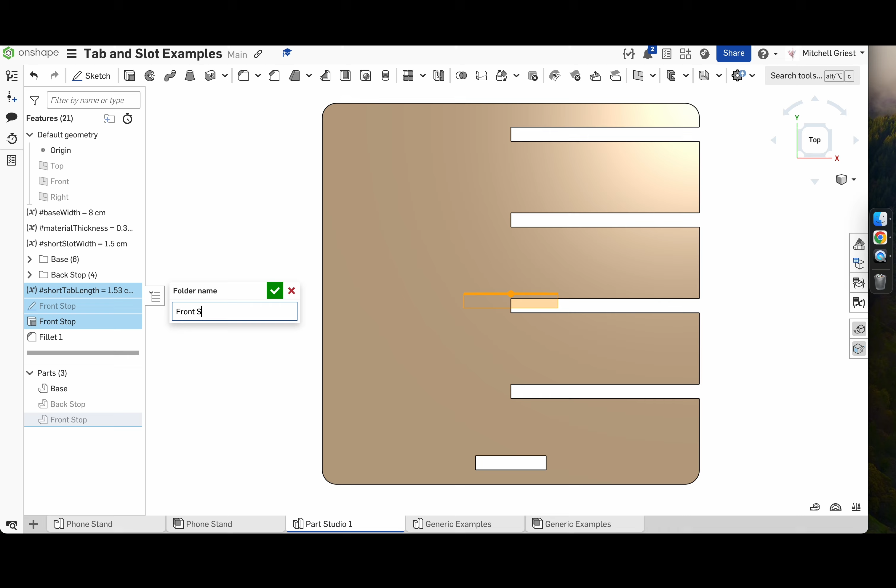One other thing we're going to do is group all the stuff related to the backstop into a backstop folder, as well as the front stop. And we'll leave these fillets on the outside of any of the folders. So let's take a look at the backstop. There's just two corners we want to round here. So I'm going to select that edge and that edge. You can think of it as what edge would I be sanding if I was going to sand around this piece. We'll grab our fillet tool.

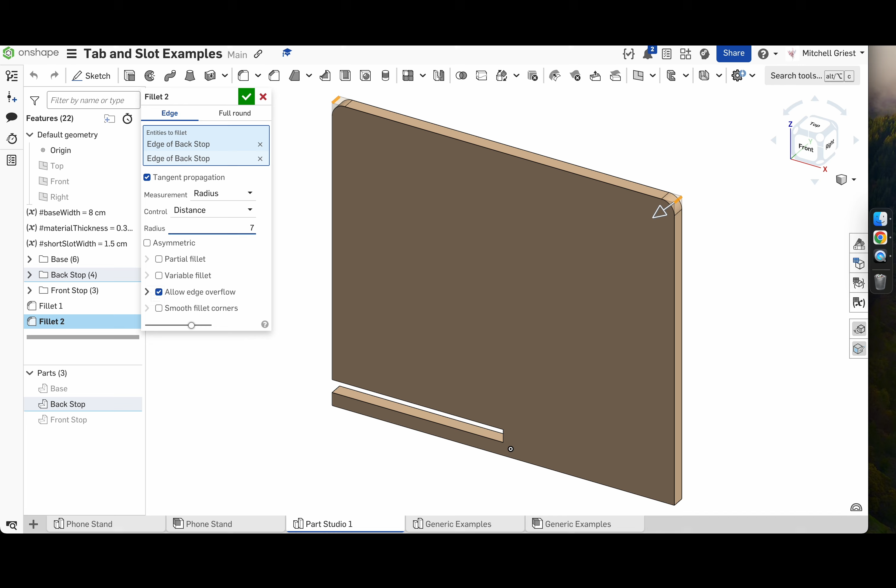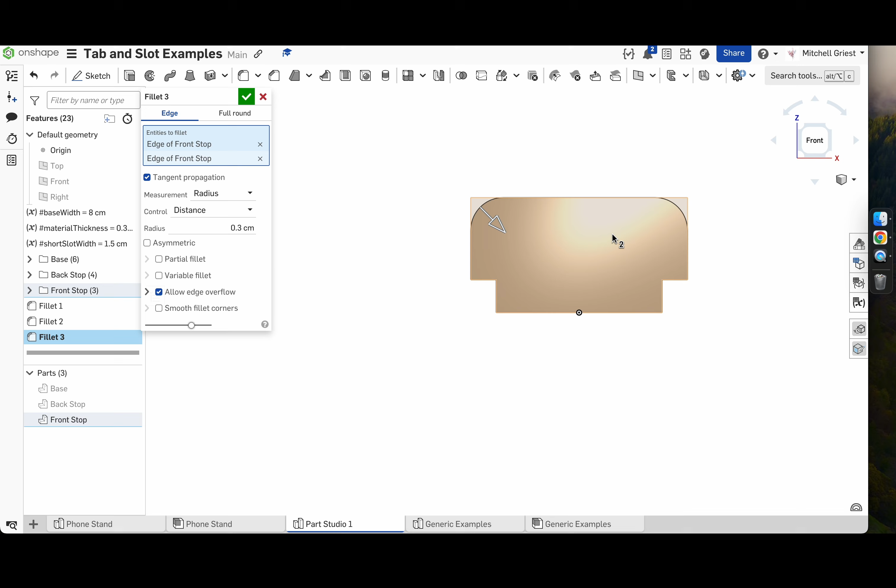For this one, I might bump it up a little bit. Let's say we wanted to go to 7 millimeters. Let's look at that from the front. I think that looks pretty aesthetically pleasing, so I'm going to say OK to that. And then we'll hide the backstop and grab the front stop. Again, we will highlight the edges one at a time that we want to have affected by the fillet tool. This one's much smaller, so I'm going to start with 3 millimeters. Let's take a look from the front. I think that looks pretty good, and so we'll round that.

So you'll notice when we show our parts now, they've got nice rounded edges. The last thing I want to show you is how I actually made this little mock-up where I could slide the pieces and mimic how they're going to fit into each other. You'll notice they're able to pass right through each other. That's because I haven't actually applied any limits to them. I've just related them along their edges, but we're going to do even better in this example. So these three parts are stationary because we're in a Part Studio. I'm not able to drag them. They're just anchored to wherever I defined their geometry using sketches.

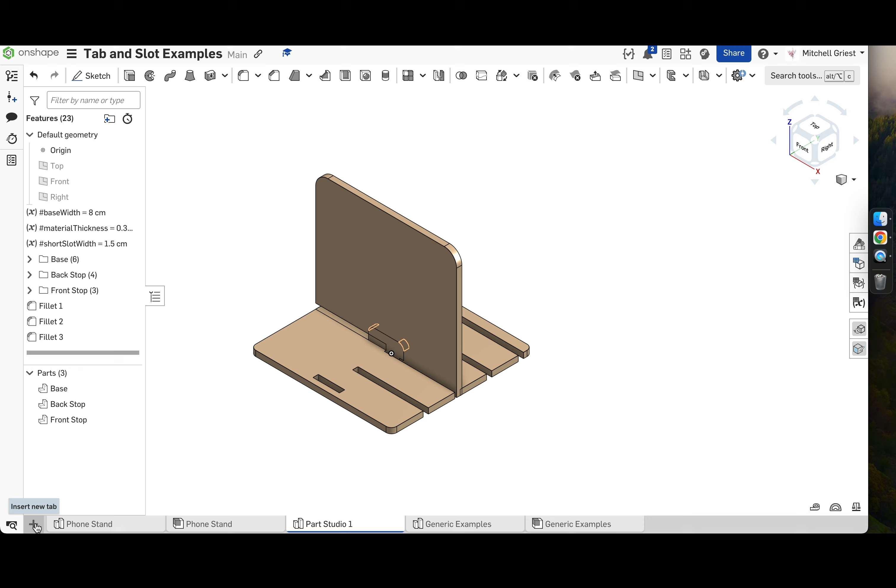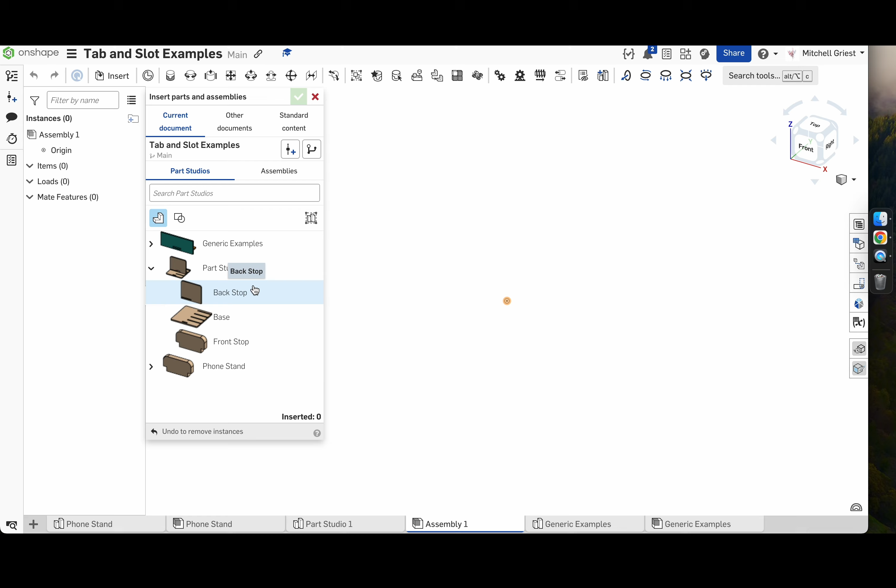So if I want to actually start to relate them and test my ideas before I make a cardboard prototype, I can choose New Tab and create Assembly. An assembly is a place where we can drag and drop parts that we've defined in Part Studios and then relate them to one another. There's a lot of different things you can do here, but we're going to start by inserting. I'm going to expand the Part Studio 1 list, and we'll start by inserting the base. That should show up, and I'm going to hit the green check.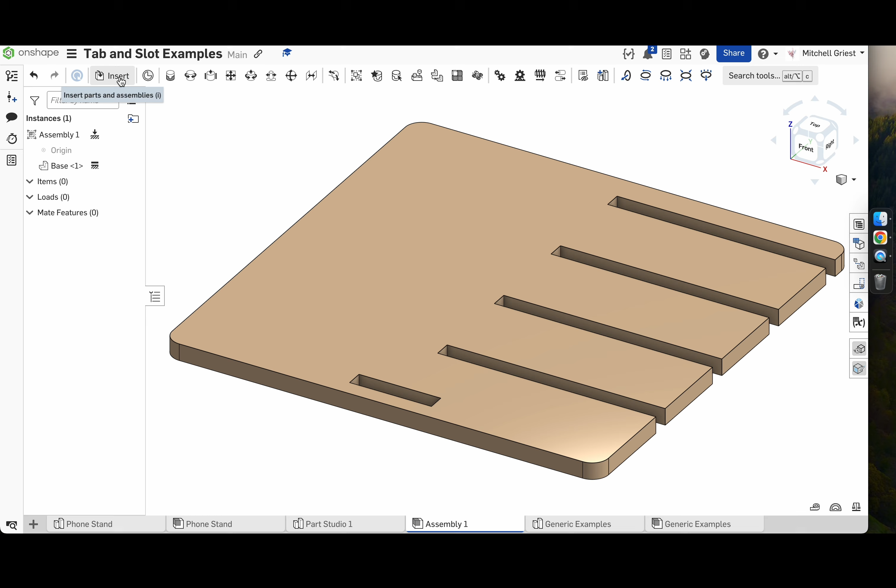If I right click on this base, I have an option to fix. Now, each assembly should have a maximum of one fixed component that we base everything else off of. So this is now fixed in space. I can't drag it. We can hide the origin because everything's going to be based on where this piece is. Next, let's expand this list and start with the front stop. You'll notice if I drag out here, the part follows my mouse around. So I'm just going to set it somewhere where I can see it. Hit the green check. And we want to mimic the way, just like I had in this one, that this drops down into the slot.

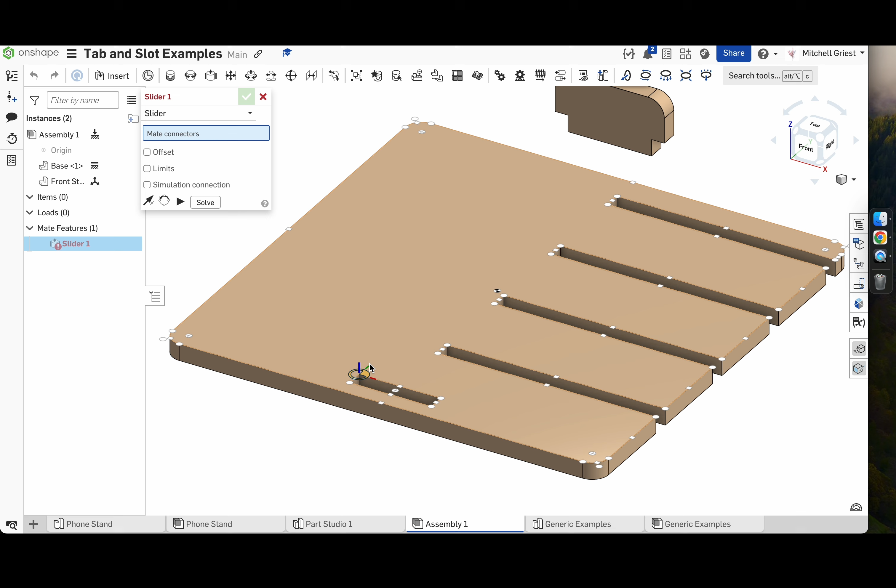Right now it has too many degrees of freedom. I can drag it anywhere all over the part. So we're going to use something called mate connectors, and these are going to be called mates. A mate is a way that you relate two parts. We want this part to be able to slide relative to this part only in the vertical axis, so we're going to use what's called a slider mate. You'll notice once you select slider mate, as you hover around, you get this little set of axes jumping around and clipping to different key features on your part. I like that this has the blue z-axis pointed upward. We're going to go ahead and select this front corner.

So we'll check that front corner should be related to this front corner on our part. And this one happens to be working right now. A lot of times to grab the second mate connector, you need to rotate and zoom to get it just right. But if I click on that, if I just accept this, now we should see that my part is just like in the other demo, able to slide up and down.

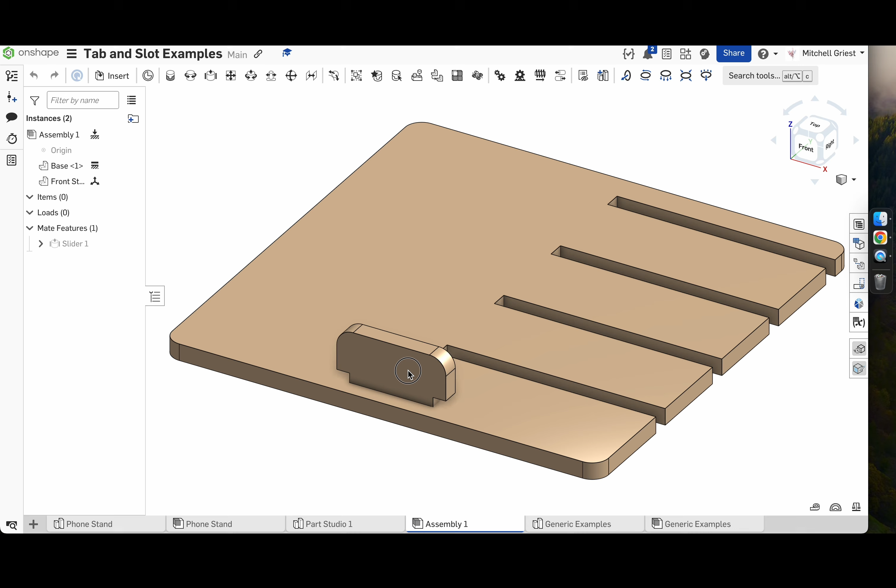But let's go ahead and limit it so that when this kind of clicks into place, it stops. We can do that by double clicking on our slider and setting some limits. So I believe the positive Z direction is up. So we don't want to have any maximum, but we do want to say a minimum of 0 centimeters, and that should limit it so it can't pass through the part.

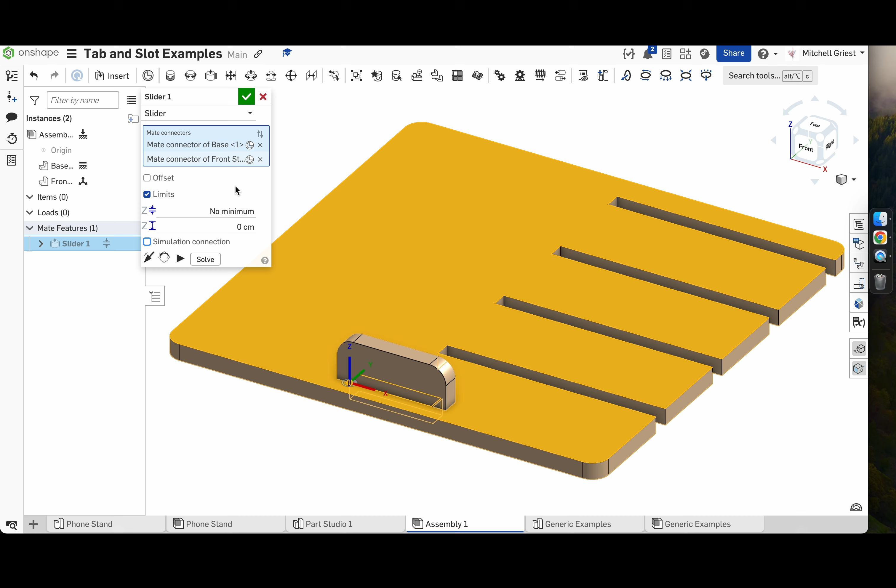Let's try this out. Looks like I got it backward, so it's the exact opposite. It's only able to go below the part, and that's fine. I've never really gotten the hang of setting these off the bat, but we can just swap that for a maximum of 0 and no minimum. Let's try that out. It looks like that's exactly what we want.

So now this part will stop. I'm not able to drag it down into there, and we can kind of see the way that it's going to notch down into our part. We're able to see that nothing is sticking out below here. Now we'll talk about that in a moment.

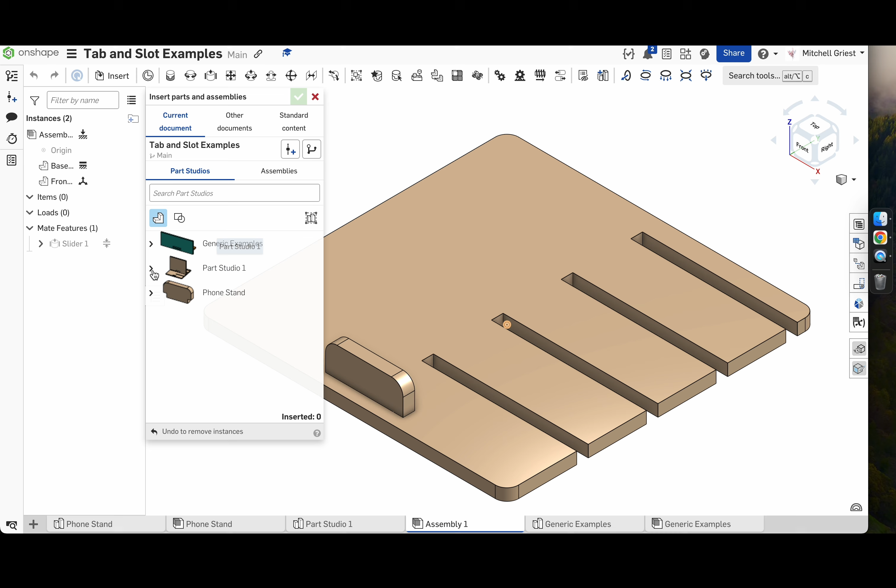But let's go ahead and bring in our final part from this drop down, which is going to be the backstop. So I'm going to drag it kind of out of the way. That's about as far as I could get it. Let's drag this out of the way where we can see it, and it doesn't matter which of these we want. For now, I'm going to just mimic sliding it into this second slot. So we're going to choose slider mate.

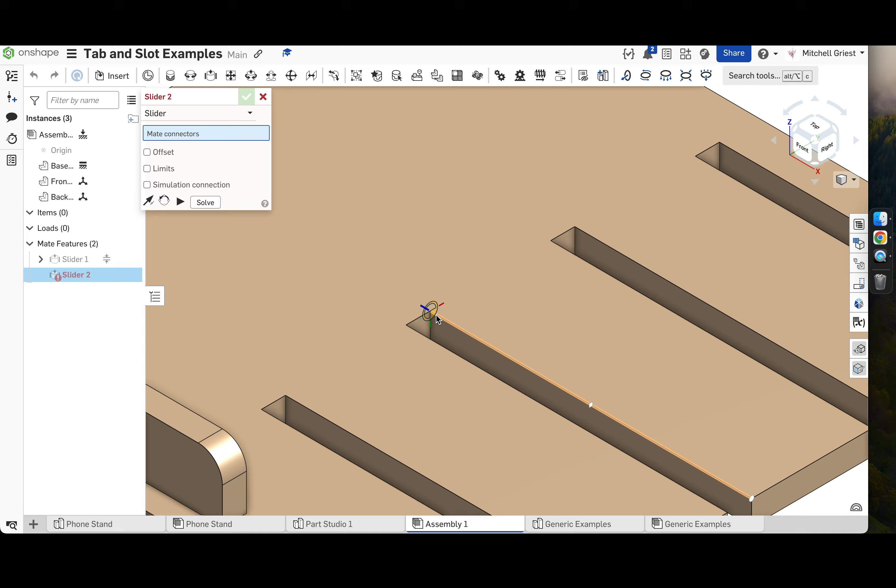We'll choose one on this corner, but we want that blue axis to run along the edge we're interested in. So we've got the back corner. That's going to actually line up with this back part of our part. So I'm going to rotate around. So that should line up with this point on the part with the blue axis pointed parallel to the edge. That's great. So we'll hit check, and let's go ahead and take a look.

So now we've got it sliding in and out, but again, we have no limits. So we'll go ahead and set a limit, just like we did on the previous one. And let's see if I got it correct. Backward again. That's fine. It's usually a little bit of guess and check for me on these. So let's see. Now it does stop when those two key points on our parts hit each other. And we can kind of simulate how this thing's gonna click together.

Just like that. Now if we look from the right side, you'll notice this slot happens to be near the middle of the part, so it's reasonable to expect that the overall stand would kind of lean back, and your 2 points of contact would be right here and right here with the table, and that would probably work pretty well for having your phone in there.

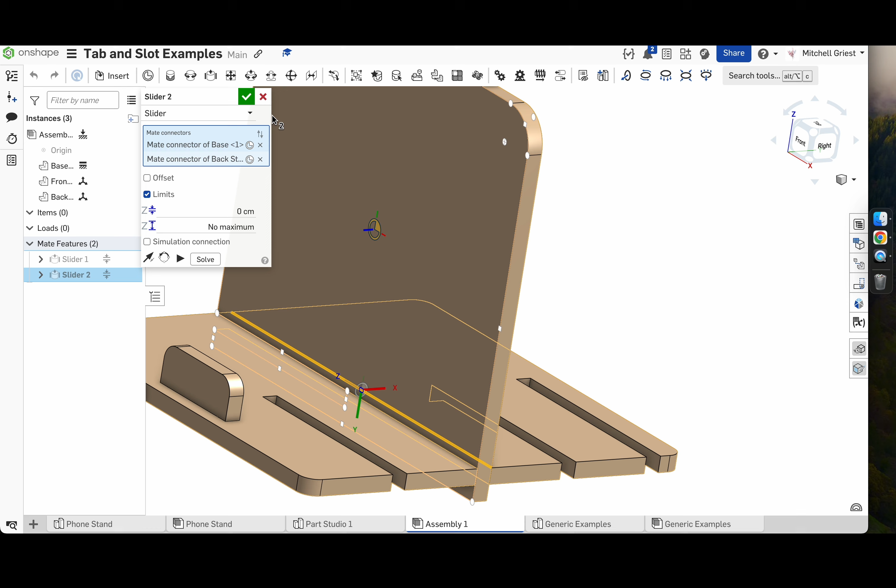What I think we probably would want to avoid with this part is having the whole thing lean forward and lay on these two parts. Now I would want to actually try this in real life after cutting it, but it seems to me that if that was leaning forward, your viewing angle would be pretty extreme. I don't know if we want that or not.

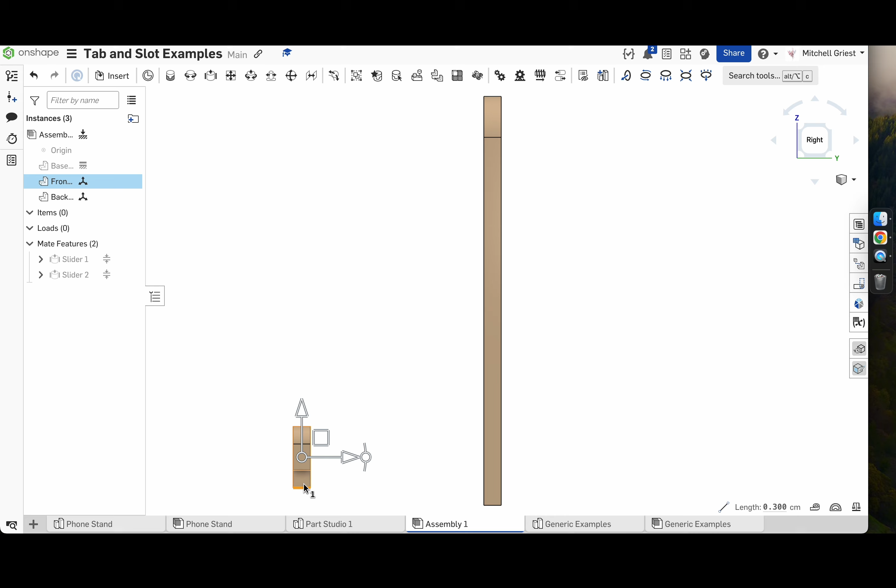If we didn't want it, one idea I had for how we could solve it is just to extend the tab on, let's hide the base. If we extended this tab so it came all the way down to here, basically extended beyond the material into which it plugs, then we would have almost like a second little table leg up front, and this might sit better. So I'm going to leave that change for another time until after we've actually tested out this prototype.

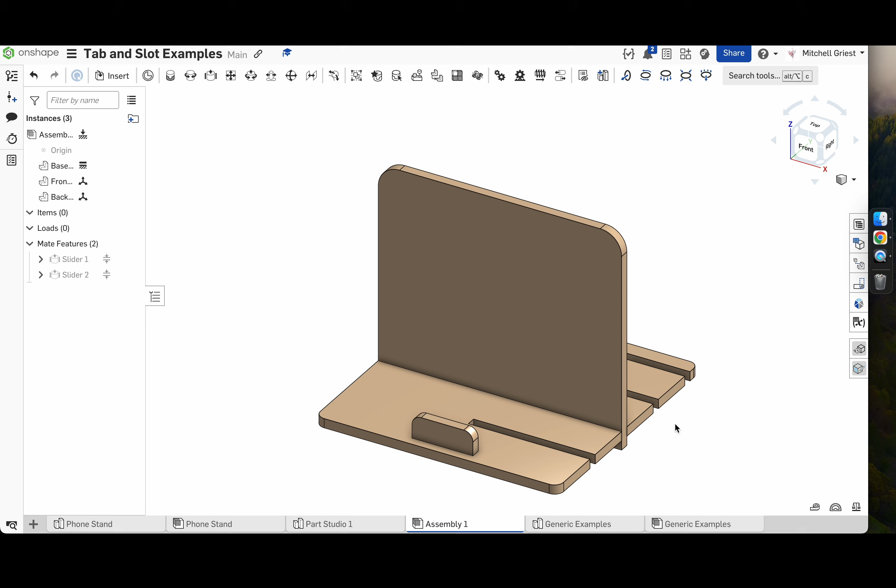But I think that this is enough for us to throw in the laser cutter and see how our phone stand works, see how we like the dimensions we set overall. Does it stick back far enough? How do we like the spacing on these notches? How did we do on the tolerance where we made our tabs slightly bigger than our slots, and things like that.